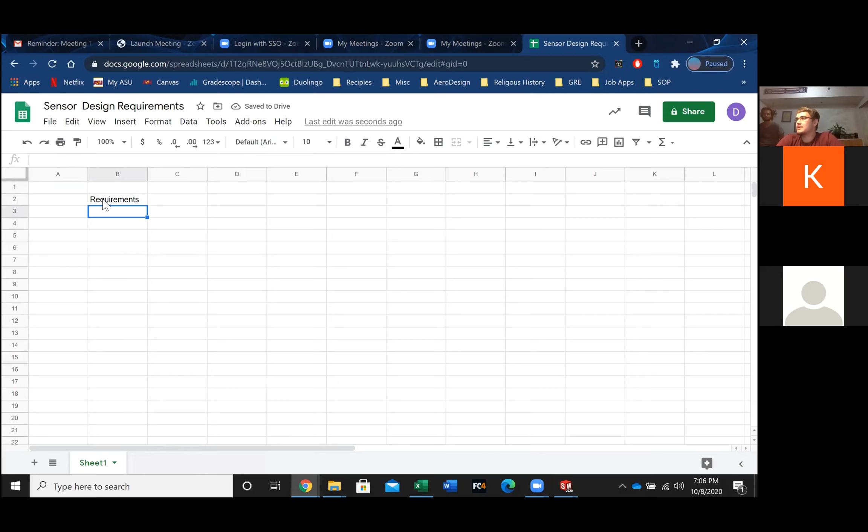So we're going to start by saying, what are the requirements of our sensor design? What are the things that are important when we decide what sensor we're going to end up using on our final aircraft? The size. And what does the size influence? Weight. Everything. Yes, but what specifically does the length and weight of the sensor impact? Scoring. Correct. That is our first requirement.

Ability to fit inside the airplane. And how can we word that in words that don't sound so simple? Oh, we're engineers here. Yeah, we got to make things almost unintelligible to the average human, but it's the almost that's important here. Integratability. Integratability, got it. Perfect, absolutely.

So what is another important thing about what our club specifically has to consider with making our sensor here? 3D printer requirements. Correct. And what's a way of making that not sound so? Manufacturing requirements. Yes, manufacturability. Because we're all about the abilities here.

Okay. Are there any other things that we should say as our requirements? Stability. Stability, correct. Thank you. All right. So we have scoring, integratability, manufacturability, and stability. That's 4 things. Let's think of a 5th. What's important here? Visibility. We have to be able to see the LEDs. Visibility. That's right.

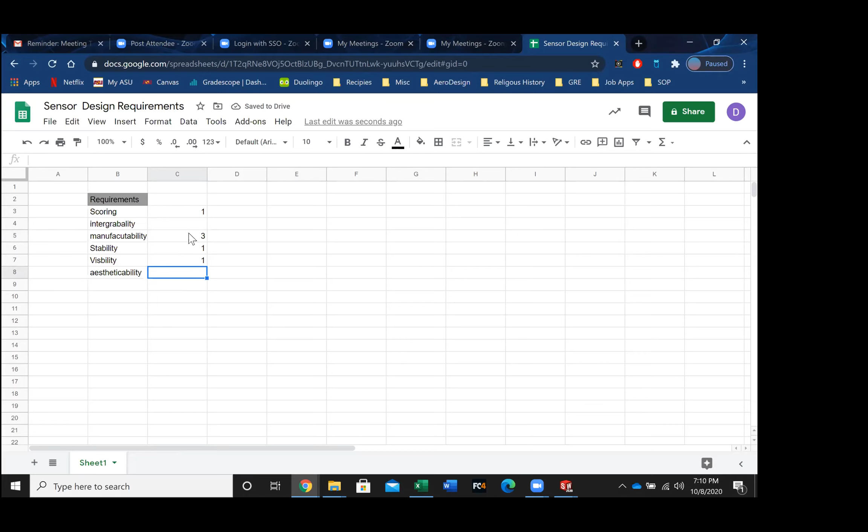Manufacturability, that's like, we'll say that's a solid 3 out of the scale of importance, because it makes my job easier, but there's only one actual sensor that we have to build, so it's okay if it's a little bit harder to actually make. Integration is solid 2, that's pretty important. And aesthetics, you know, we want our sensor to look cool, but it's ultimately not that important.

So we'll put ranking, and then... so now we have a scale factor, which if I reduce the number of points here, so now we have a scale factor by which every one of the following mission designs will be then scaled. So let's just let me fill these in.

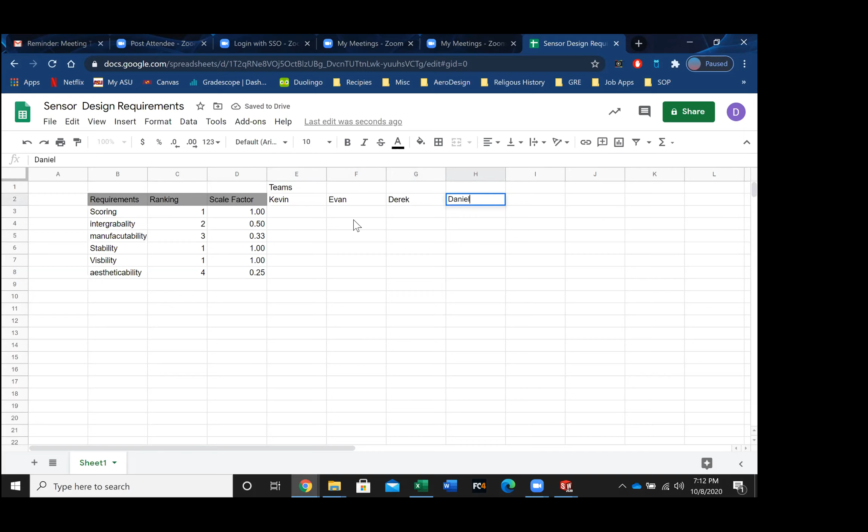So now we have different teams. Those of you who have so far submitted designs include Team Kevin, Team Evan, Team Derek, Team Sticky Keys. Gosh, uncultured. Next, Team Yoga. And has anyone else submitted designs? I have. Okay. Yeah, so Team Jack. All right. So, what about Ivan? Oh yeah, Team Ivan, of course. The original. The original, the OG. So now we have our 7 teams.

And then we will... just drag this along. We'll rank each team a certain number of points. Probably 10 being the greatest amount of points and 1 being the least amount of points on the abilities of each one of these teams in that specific scenario.

So let's do this, and let's give it a nice color. Let's do a nice yellow. All right.

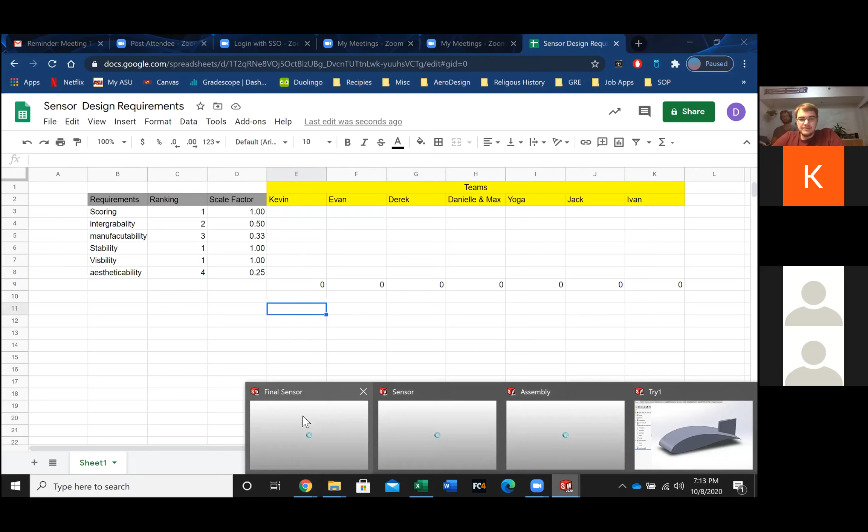So let's start off. Minor problem here is I don't actually know whose design is who. So if this is your design, please call out. Yeah, that's kind of mine. Okay.

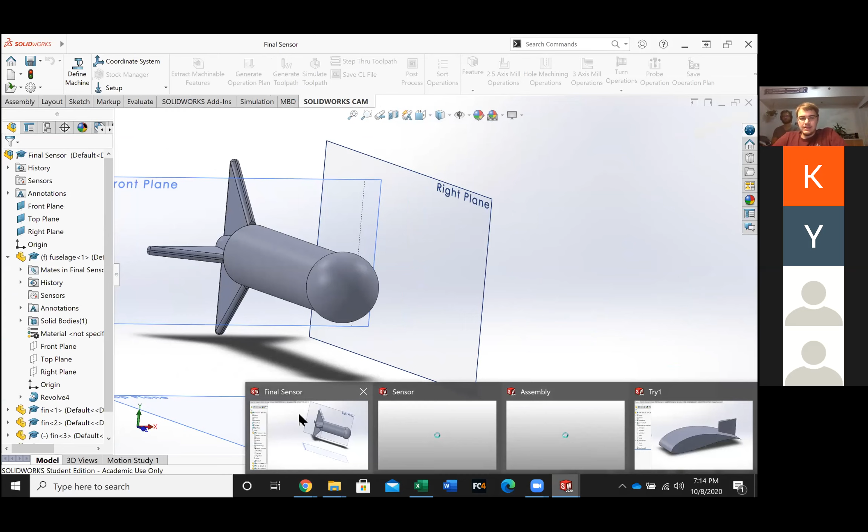All right, so let's go over this. So if we pull up our grading spreadsheet here—oh, not this one, this is... oh god, what is that? That's Excel. We don't use that here, we use only the most... close this off.

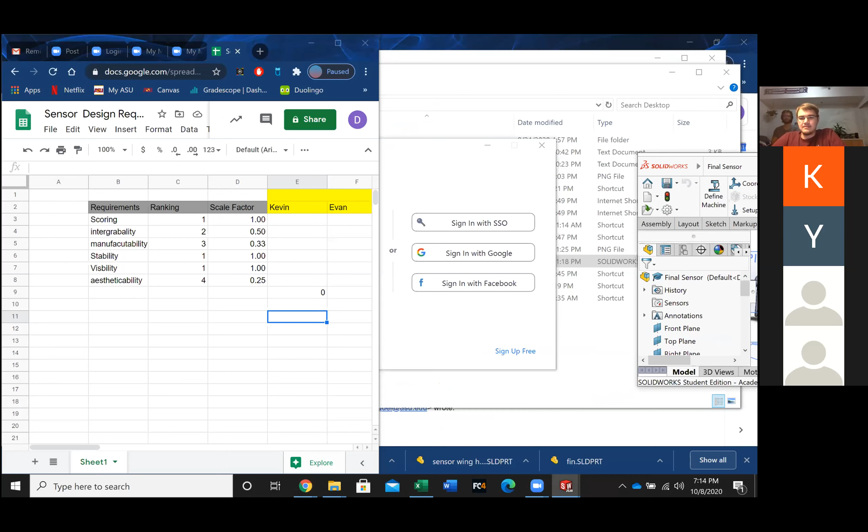I will actually keep that open because I don't know if you want to save that or not. Too bad, it's being saved. There we go. Okay.

Sorry, I'm grabbing the wrong thing here, the wrong edge of the window. So y'all can see both screens, right? No, they can only see one. I can try and put it on both. Yeah, let me try that. No, I meant like both windows get open. Advanced.

Yeah, I'll share screen 2 instead, just so it's bigger and easier for everything else. David's been used to my setup. Yeah.

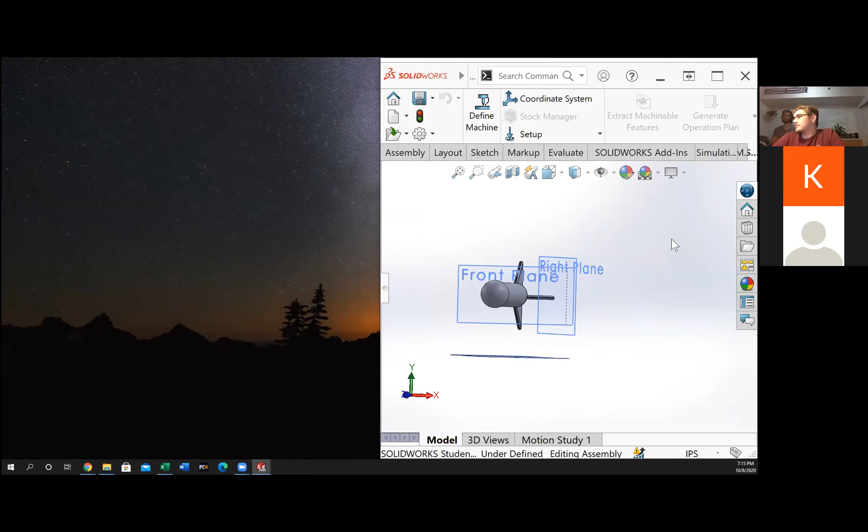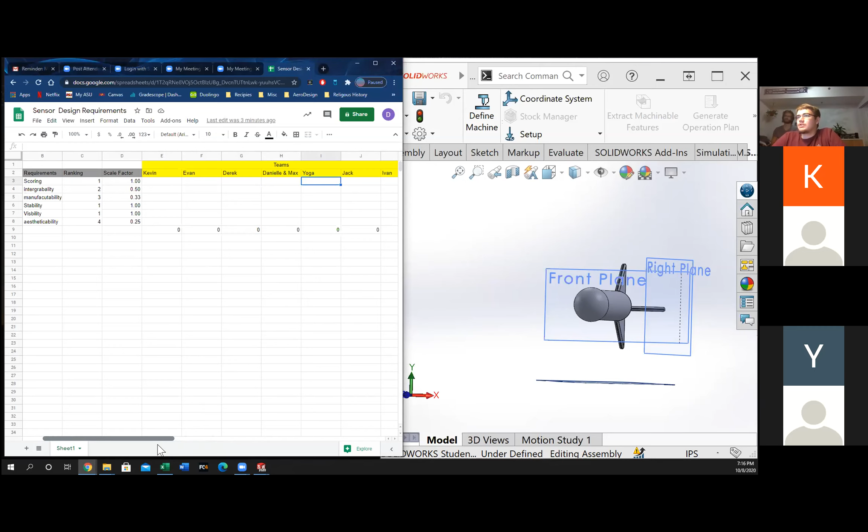Okay, so, yoga. So I'll be honest, the scoring thing doesn't really matter in this competition, because I didn't give you guys a specific length or weight requirement, or length or width requirement, as long as it met the 4x1 ability.

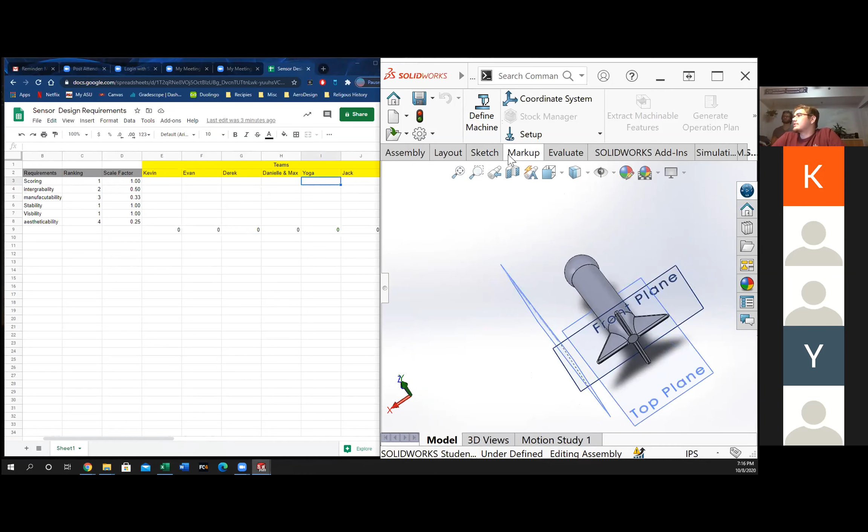So we'll just scale that based off of the actual measurements of it. So if I come over here and measure from its widest point to its... I just realized I didn't take into account the fins for the diameter to length ratio. Okay, that's fine, so you have 5 inches wide and to the tippy top of this—ah, it doesn't like that.

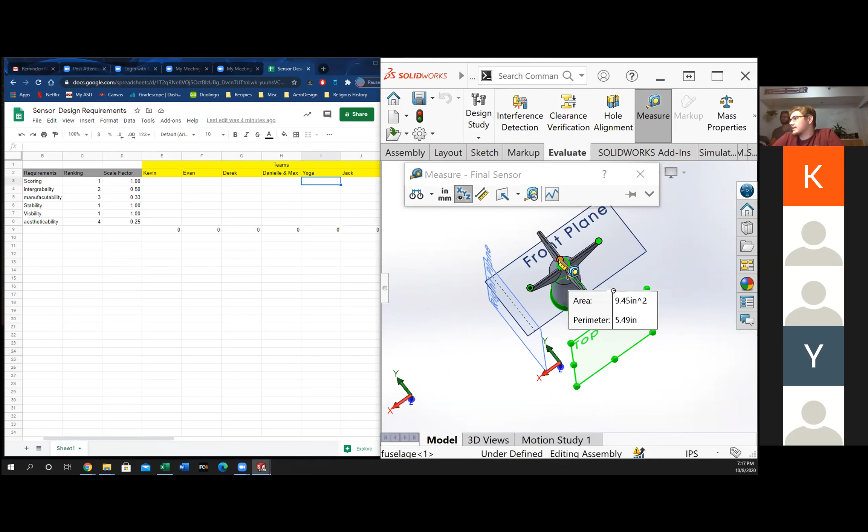Sorry, this is my bad. Scaling from that, I think you're gonna have to deselect some things first. Very true, let's just mash escape a couple times, it usually fixes things up. So it works, yeah. Doesn't want to select the nose. Just put there, and put it back. So it's 6.51.

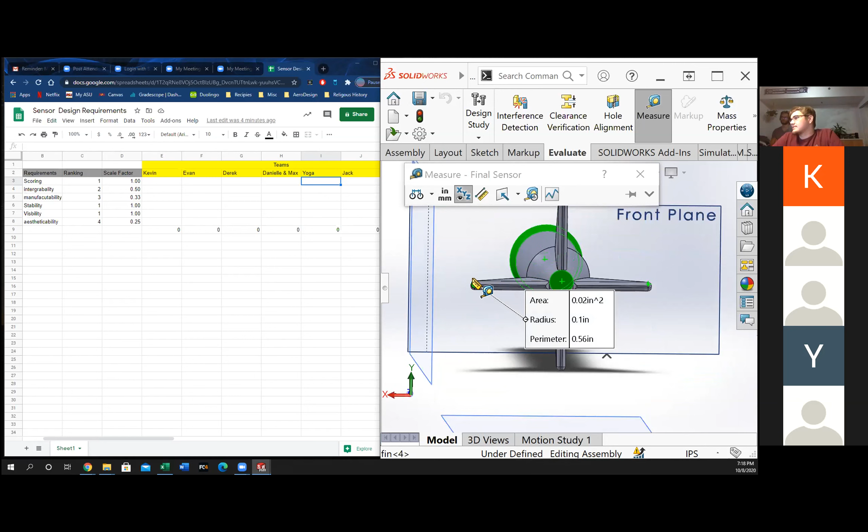So you have a 5 to 6, so that's a 1.25. Is that 5, right? Sorry, this isn't your fault, this is mine. Okay, so it's 4.81, so it doesn't meet the scoring requirements, but that's okay.

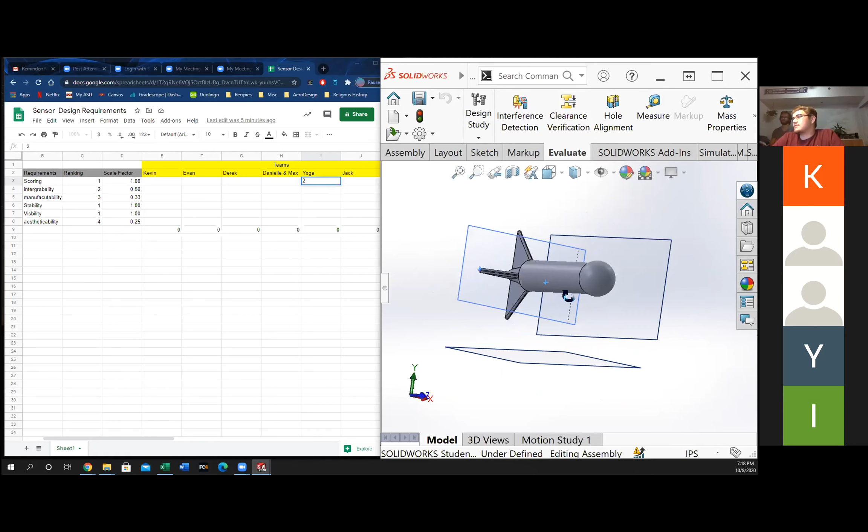You know, it's something to keep in mind for the future. So let's put that as like a 2, because this thing will be pretty heavy, and that's actually good for us, so that's a good thing in that integratability, because of its good length to width ratio it would be fairly easy to integrate into the fuselage. But we can't really score the rest of it, kind of, so let's put that at like a 3.

It'd be very easy to manufacture, let's put that at like an 8. This shape, I imagine, would actually be really stable. It's got those big fins and good length to width ratio, which actually would make it very stable. Let's put that at like a 7.

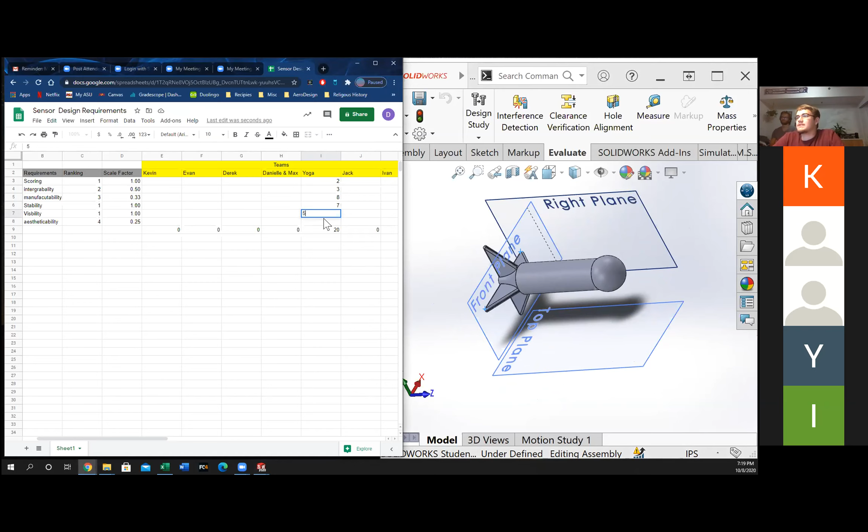Doesn't really have visibility concerns in there, but because of its dimensions, it would be fairly easy to actually integrate that finally, let's put that as a 5. And while it is a good first attempt, I'll be honest, it does look kind of ugly. I'm sorry, I gotta be honest, so we'll put that as like a 1.

Fixed. It doesn't, all right, that's fine, that's easy enough fix to make. We will just insert one left, insert one left. So we'll just have this be equal to uh, we'll just drag this over a bunch. Let's do...

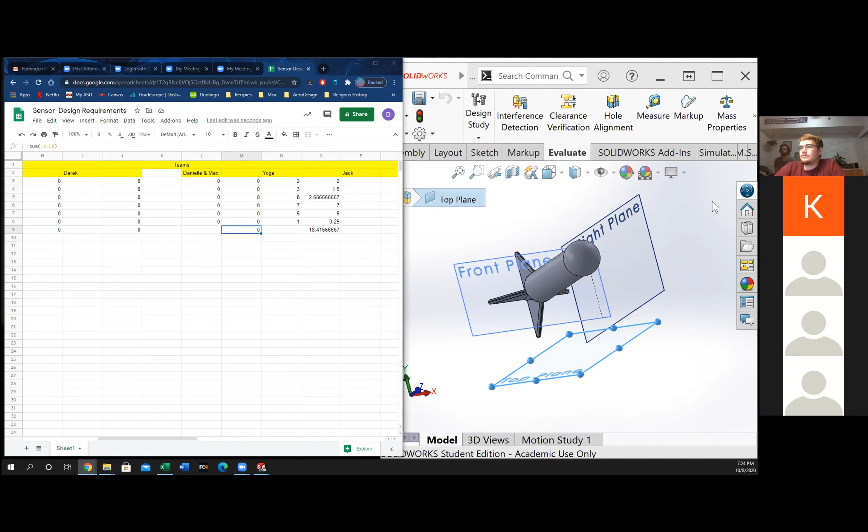Okay, now let's bring up this one. So whose design is this one? That one's mine. All right, Kevin's design.

So as part of a scaling factor, we will first check to see what his diameter is. So it's 1.5, but the fins seem to be farther out. So we'll check on that. So about 1.78 across.

No, they're 2 across. Got it, it's off center. And then we'll measure from here to here. SOLIDWORKS and its always intuitive measuring tools.

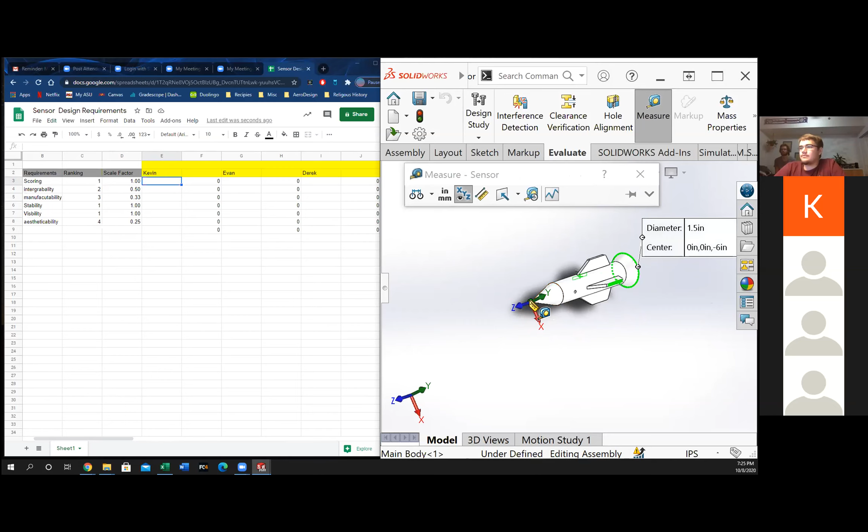So 6 by 1.5, that's an aspect ratio of 4. So that is slightly more than what is required. So we'll put that as like a 6.

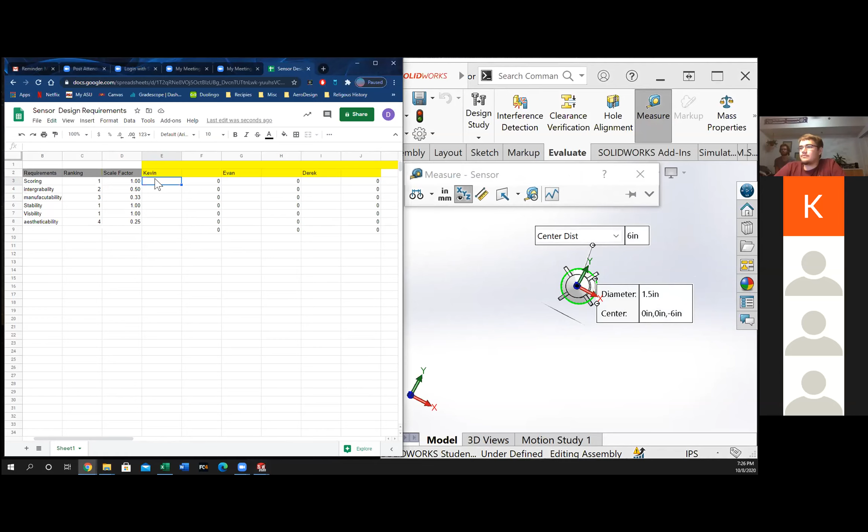Now integratability. The shape should be pretty easy to pull into the actual aircraft itself. It's got a spot right here for what I assume to be a tow line to the aircraft. So he has integratability in mind. And the general shape, there's no weird protrusions or anything, so that makes it pretty easy to integrate.

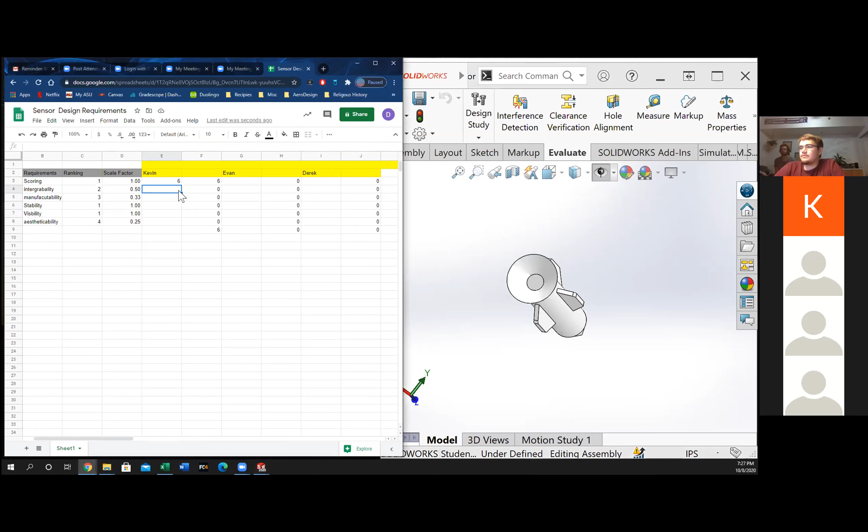So we'll put that as like an 8. Manufacturability: this would honestly be kind of hard to 3D print because it has this rim, this small surface area on the base to actually print from either side. And this cone would also be kind of hard to 3D print. But it's doable, probably put that about like a 5 or a 6.

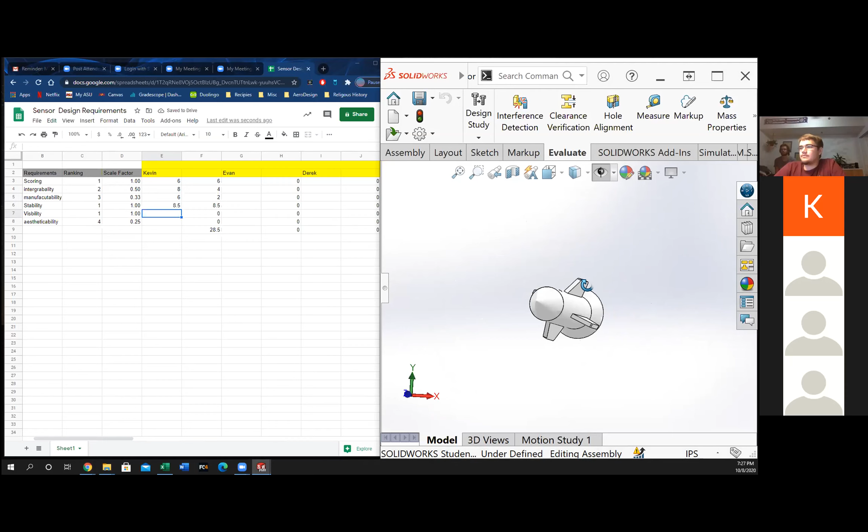Stability: it's got the fins for the roll stability, and it's got the frustum for vertical stability. So I'll put that as like an 8 or 9, let's put it at 8.5. Visibility: again, it'd be pretty easy to integrate different lights into this, so we'll put that as like an 8.

And aesthetics, it reminds me of a missile. The nose is pretty pointy. Would be a good hypersonic vehicle, or actually not a good hypersonic one - you want leading edge radius - but well, you know, it's got that classic missile shape.

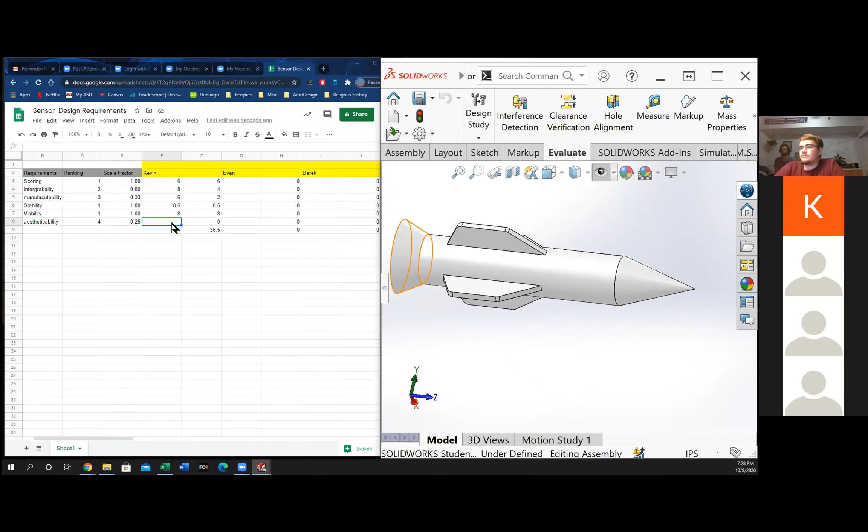Let's put that as, what do you guys think? What would you rate as the aesthetics of this? 7? I got one call for 7. Any other calls for any other numbers? 7 sounds good? All right, 7 it is, 3 calls for 7.

So total right now is 43.5 points.

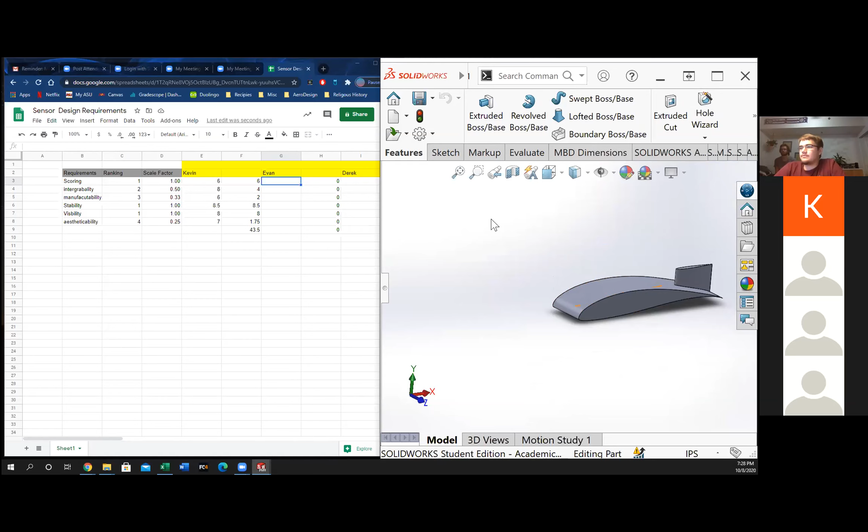Now let's see what Evan's design looks like. So this thing is pretty wild. Evan, you want to walk us through your design right here? I mean, I can. It's really not done, I didn't finish it in time, so there's no hook point or anything.

But I took a thick cambered airfoil, had to be thick to fit the battery inside. It's an airfoil camber that's designed for human-powered flight, so they're for very low-speed flight, much like our aircraft is going to be performing.

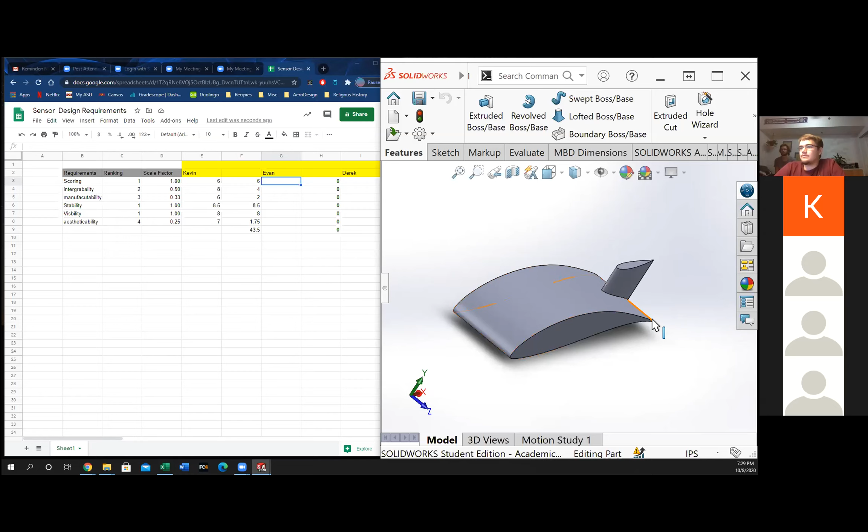It's got a single stabilizer in the back for yaw stability. The goal is to create some lift so it can counteract some of its own weight. Obviously it's not going to create enough because of the low aspect ratio - it's going to lose a lot of those edge effects and not create a whole lot of lift, but it'll be at least a little bit. So hopefully the increase in lift against weight will counteract the drag that the actual shape makes.

Right now I haven't put any roll stability on there. I was going to put some sideways fins on it to help with the roll. So right now I didn't have time to test it to see what it would actually do.

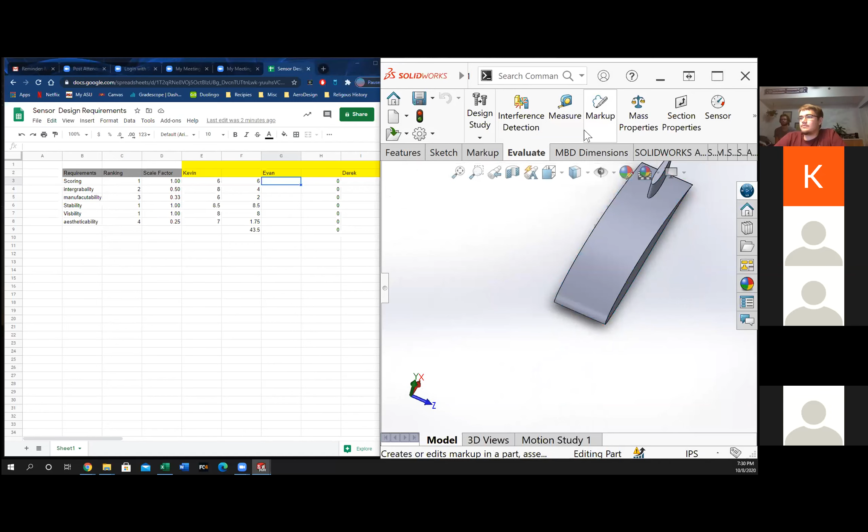So it kind of looks like a piece of salmon too, if you guys are into salmon. It needs some winglets. What was that, Evan that said that? I guess we can't fire a chief test pilot, but yeah, you're fired for that. We can promote him to safety officer. Ooh, that's true, run him out of my hair. The ever-encompassing daredevil's punishment. Yep, absolutely.

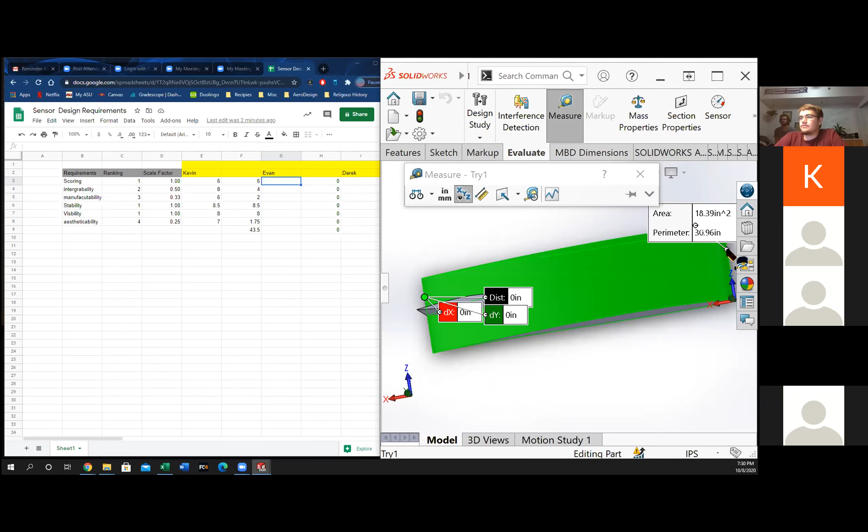Alright, let's pull out this thing. I believe I saw it was 6 long and 1.5 wide, so it meets the scoring requirement.

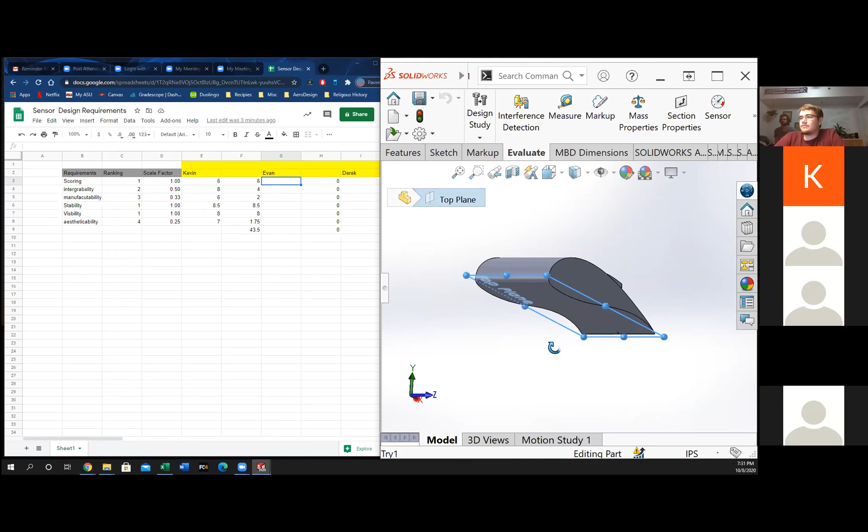How do you think the volume efficiency of this actually is? Like how effectively does it use the weight? Compared to a regular shaped object, how heavy do you think this is? How much volume does it have to put more weight in? Just for my own design, on a scale of 1 to 10, how well does it use its volume to create weight?

There's a lot of unused space inside there, but you can also do it empty. I don't know, I'm gonna put it up to the group. It's a little bit, probably not, definitely not top tier. There's a lot of wasted space inside there, so maybe a 5 or 6 on that one.

Alright, 5 or 6 it is. My own rating is up to 7. So if someone else says like 3 or 4, that could work too.

Just drag this down. Alright, so interchangeability or integratability, not the best. I think this will have issues when it's actually coming into the fuselage of the aircraft.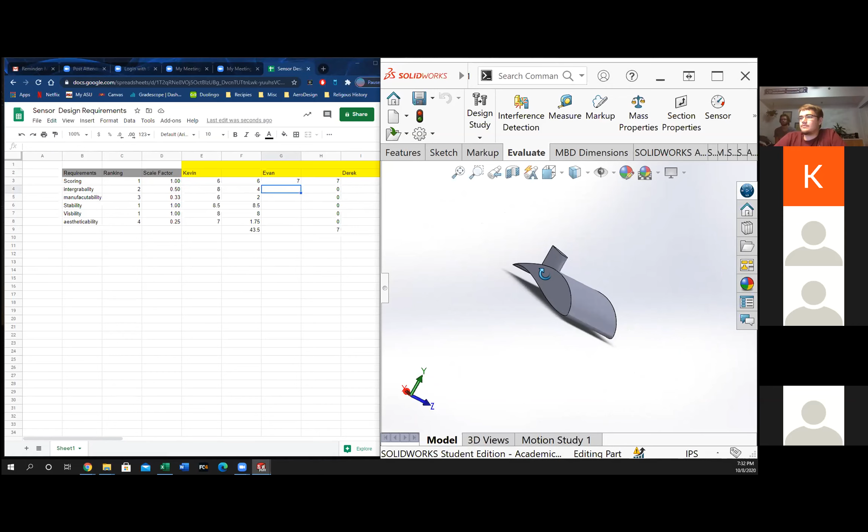Manufacturing: it'd be pretty easy to print this out, depending on how you printed it, either flat against this side. You might put some supports on here, but...

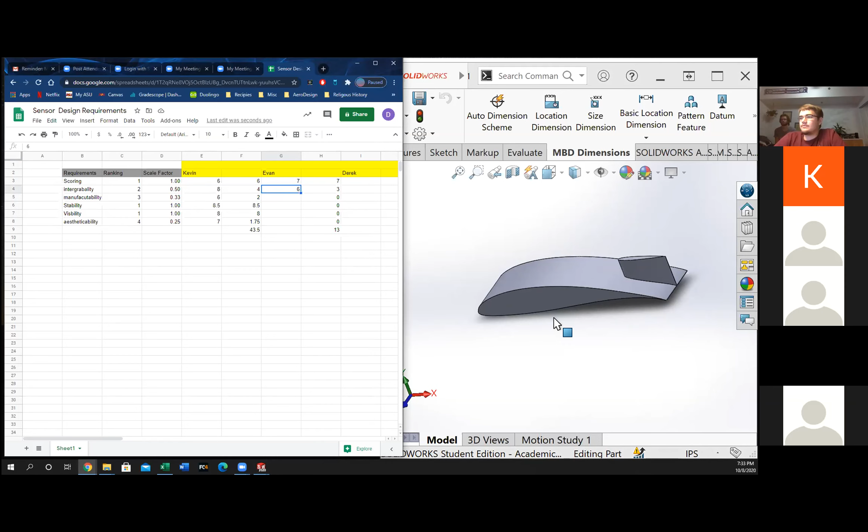Actually, I'll mark this down a little bit on integratability from what it was, because the other thing about integratability is how we're going to fit in the electronics, and it's going to be pretty hard to fit them in.

I designed a fairly thick airfoil, so there's a lot of room inside there. I don't know how big batteries are, I didn't get any specs on that. And how big are those batteries anyway?

They're fine, depends on what batteries you get. We did have a spec for a certain battery size in one of these, you could find them in any size, like a 1.5 by 1 battery. I don't know how big that would be off the top of my head, but it probably exists. We'll bump that up to 5.9.

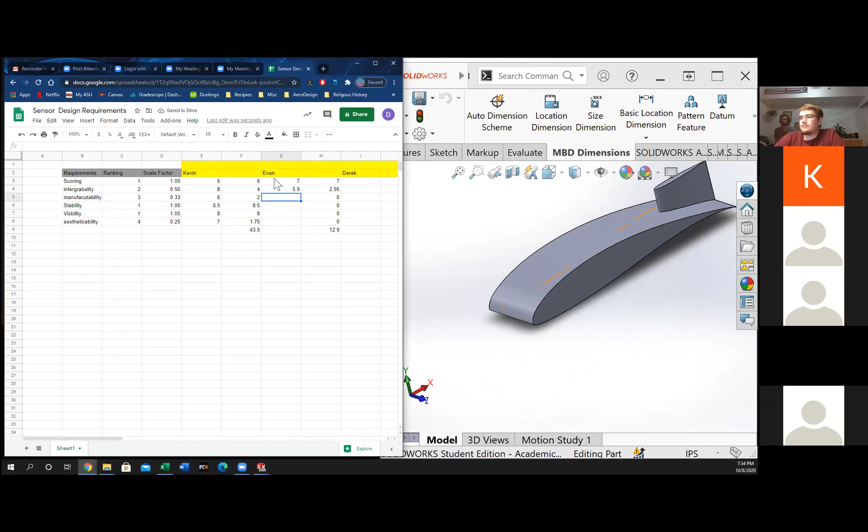Manufacturability: it's fairly manufacturable, as long as you pick a flat side to print it on. It would change probably with how the fins fit into the sides. So for now, let's put this as a little bit more manufacturable than Kevin's form factor — put that as a 7.

Alright, stability. What's the pitch stability like? So at high or low angles, it's got decent pitch stability, positive, so it wants to nose down, which is helpful since it'll be towed from the front. Have you thought about where you're going to put your tow point in relation to the quarter chord? Yeah, a little bit in front.

As it currently stands, the roll stability isn't the greatest, so it's about 0 — that's something you haven't considered yet. Winglets, of course, something like a lifting body, like the Dream Chaser — you guys have seen that space reentry vehicle, it's pretty cool looking, might be good.

So it doesn't have — well, it has good pitch stability, it has good yaw stability because of that fin in the back, but it doesn't have good roll stability. So it has 2 of the 3. Let's put it at 2/3.

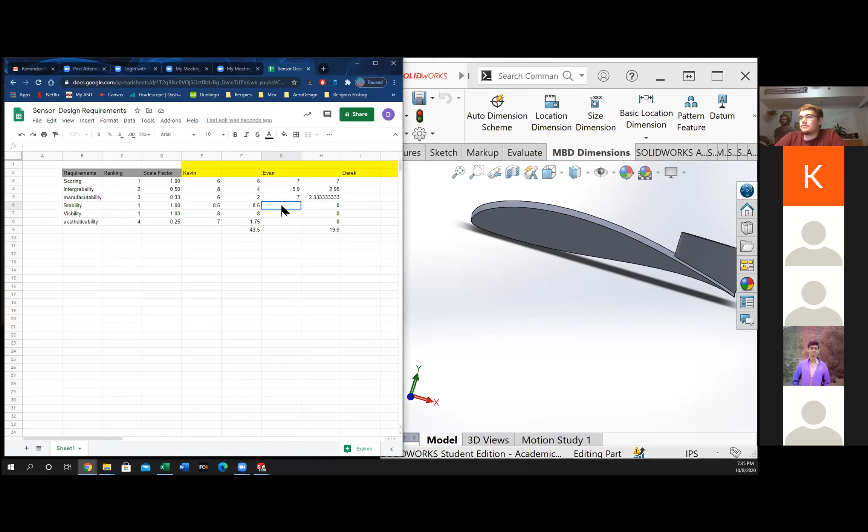Actually, in relation to what we put the other one at, 8.5, it's probably like a 7. Give it the extra third of a point there. Visibility - you could probably fit some LEDs on the underside here, because no one cares about underside flow, it's the top side flow that matters.

You want to slow down the underside flow. Yeah, exactly. They get stagnant here, it's higher pressure.

All right, aesthetic ability, I don't know about. It looks like a piece of sand. What's - a 3? A 3? I got a 3 in the peanut gallery.

Anyone else have any scores they want to put this at? Give it a 4. What for? 4, hey, thank you, 3.9. Okay, we got 1 9. Wow, someone really likes their sand. Let's go with a mode instead, or median instead of mean.

All right, let's do - so we have 1 3, right? A couple 4s, how many 4s do we have? We have a couple 4s, 4 4s, we have 1 9. That's really gonna help my case. Thank you, yeah, I'll second the 9. That was a 3.9, so we have 2 9s, 4 4s, and 1 3.

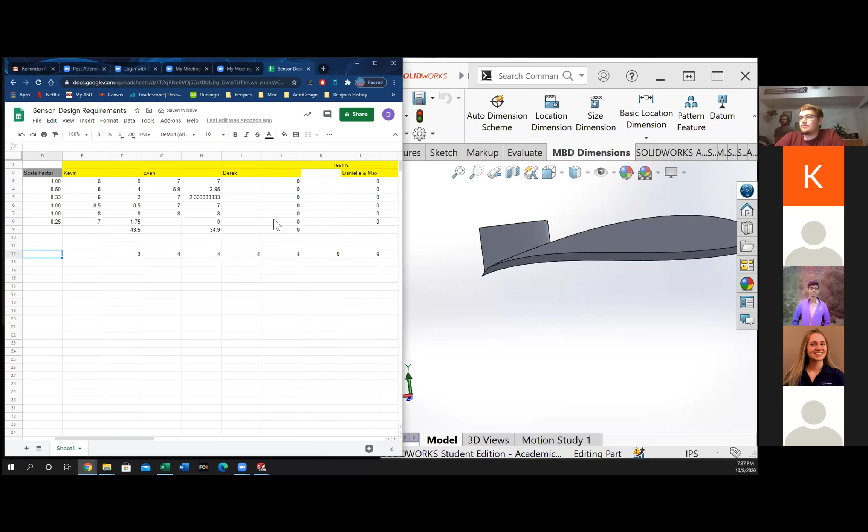Is there any other cases before we close? I'll do a 1 just to bring it back down. Okay, I'll put a 3 to bring it back down. We'll replace one of the 4s with a 1. I'm keeping my 4. Okay, you got one person keeping the 4.

Sum divided by - should have done this in Excel. Listen, all right, you had it. So divided by blank. How much is that? 1, 2, 3, 4, 5, 6, 7, 8. It's wrong.

4.25 is your average, it's better than the 3 that Jack gave me right off the bat. Okay, okay, oh, you're behind Kevin's score. Now let's see, Derek - did Derek send me his?

thebomb.com. Derek, score you wanna - 11. I can, but my mic ain't working. I don't know why. Okay Derek, explain yourself in here. Explain myself? It's a relatively simple design.

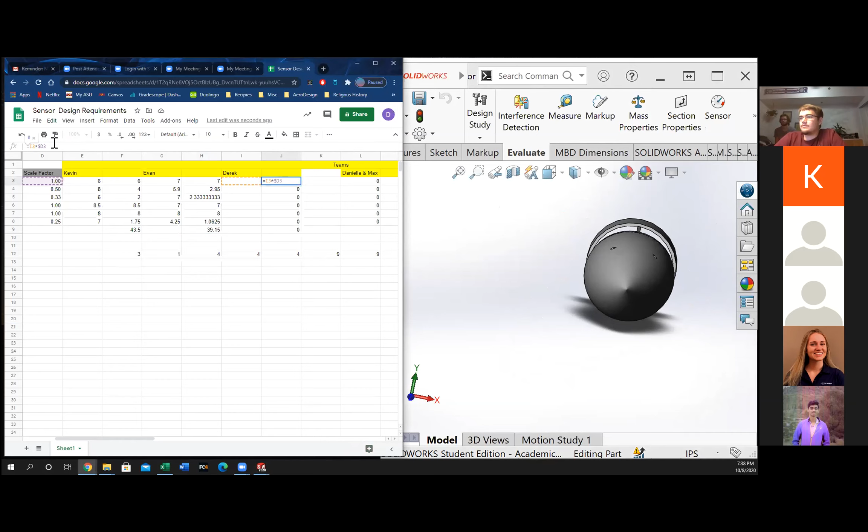It's just a football shape with a tail cone on it, essentially. Football with tail cone, basically. Yeah, all right, the cool part is it really - what it looks like, it screws together. You put threads on this? Yeah, so if you cut it down the middle.

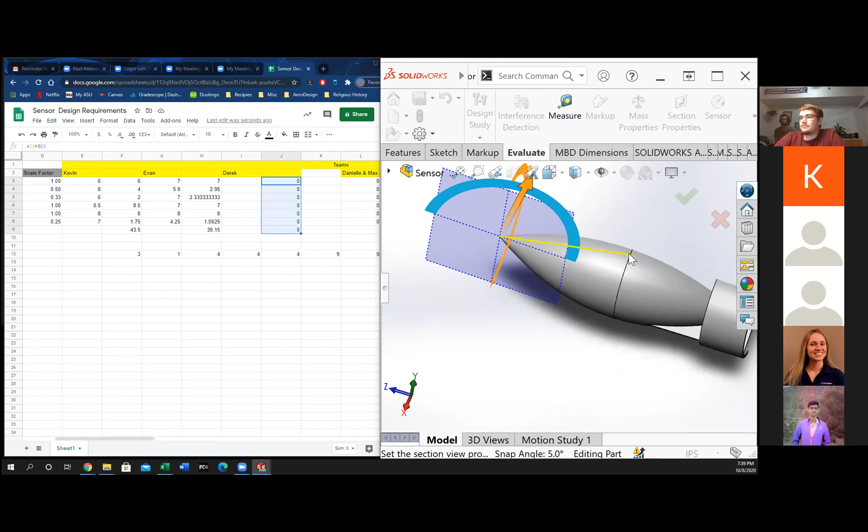So how am I going to be able to 3D print this? Let's guess, it can be split into multiple parts, it doesn't have to be explicit. 3D printing threads is something I haven't gotten to do yet. 3D printing threads is easy, I have printed them on multiple occasions. Fair enough, I don't know.

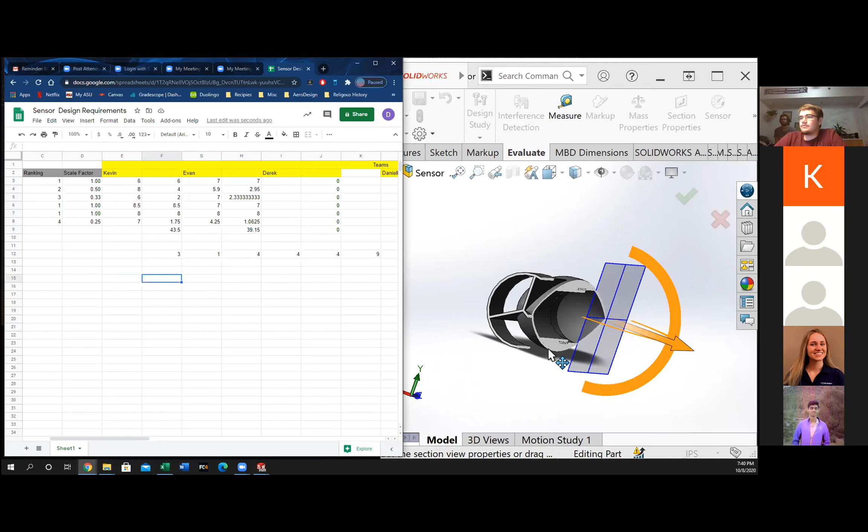I also have to put a mounting lug on it because I would want to kind of move the mounting lug around, if this shape ever decides it wants to fly. I don't know if it does. I'd want to move the mounting lug around to see if I can balance it. Well, at some point we'll throw it up though. Yeah, but I would want to move the mounting lug to see if I could balance it statically. Very important. But statically and in flight.

Okay, because too far forward it's going to be tail heavy, too far aft it's going to be nose heavy. So see if you can balance it - here's the problem, it'd be on the top load. What, oh, it's 3 to 1, isn't it? 3 to 1, oops, let me make it an inch longer. I'm solved - 2 inches longer. That was big, give me a minute, this was late at night.

Okay, so it doesn't meet the length to width ratio. So what do we say that score is if it doesn't meet the ratio? You're going to put me at 0.

I got one call for 0. Anyone else have any calls? Oh, come on, somebody give me a pity 5. 5? Okay, 6. 5, 5, 5. What is the score for?

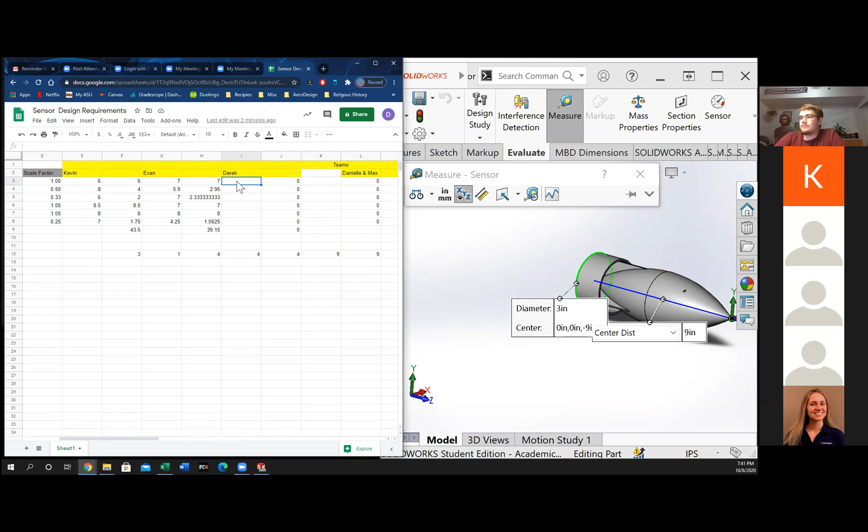Ability to score. Well, should be 0. But most of the others have units, so it changes like that. No comment? All right, I heard some 5s. I don't want to do the average thing again, that took too much time. Let's put it as a 5.

Okay, let's see what the interchangeability or integratability is. It's a round shape, it'd be pretty easy to just drag into the fuselage. It's probably one of the easier ones because it's very self-contained, there's nothing to snag on. So I'll put that as like a 9, it's probably the most integratable.

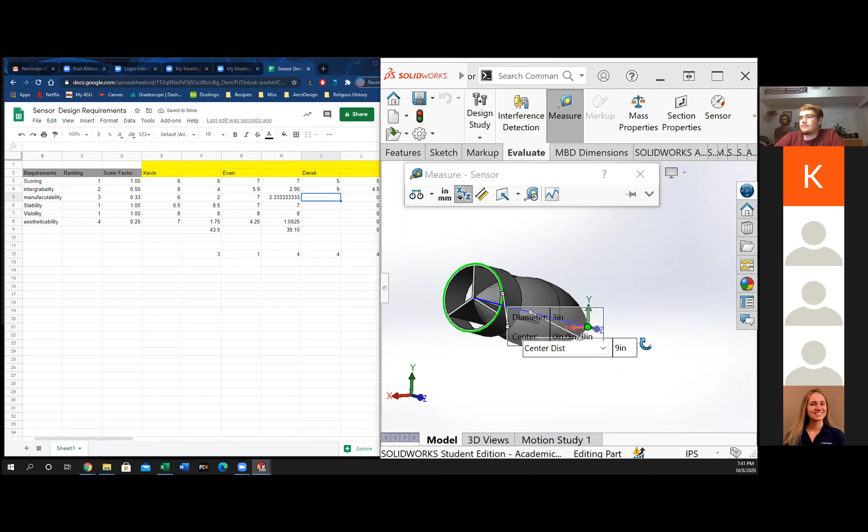Manufacturability. Besides my own inhibitions about the spirals right here, it's a pretty easy print to do because you print like this basically, and these things act as support for the circularness of everything else, and you print this piece. So that's pretty manufacturable, fairly easy for me to print without any issues. I'm willing to call that a 7 or an 8, probably 7.5, 7.45 actually.

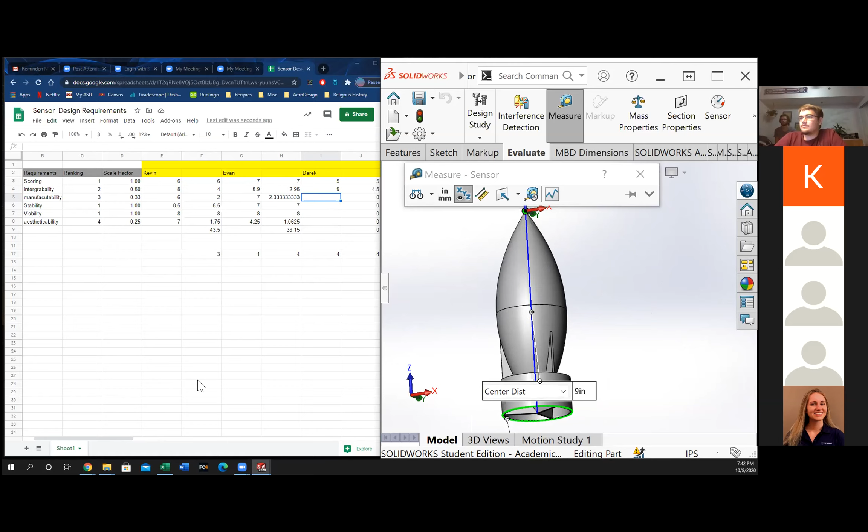About 7.45. Stability, so I have no idea, it might be okay or it might be garbage. It looks like a little face. I think it really depends on where the mounting lug is, which is why I wanted it to be kind of up in the air.

Roll stability should be fairly good because it has these things. Pitch stability, I don't know, well pitch stability is going to depend a lot on if you can statically balance it. Especially with this design, yaw and roll are pretty good, pitch is a little sus. If this was Among Us, I'd probably vote pitch stability off. But I'm gonna call that a 7, 7 for stability. Actually, I'm gonna call that 7.5 because I think it would be more stable than Evan's design.

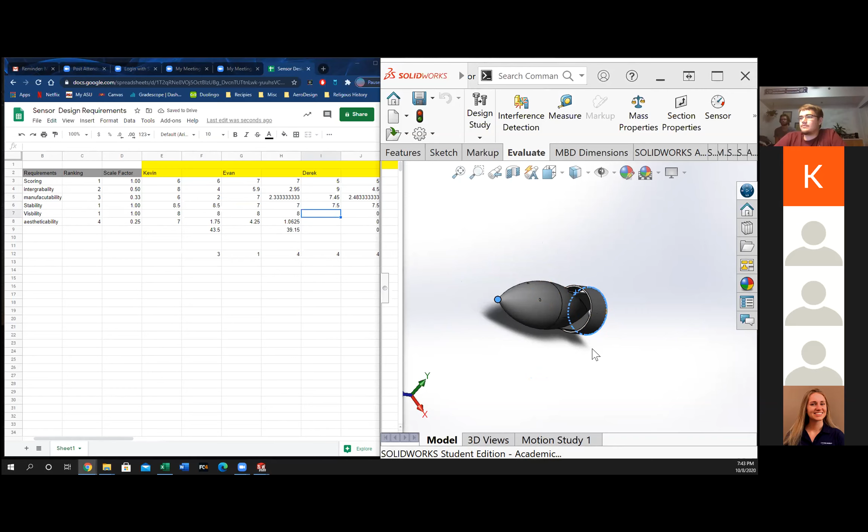Aesthetics, I like that it kind of looks like a bullet or a fat man or a mini nuke, if any of you played Fallout. Yeah, 11 out of 10. I give it a 9. Okay, so the average is at 10 right now. I give it a 0. So the average is at like, I don't know, it's too late for math. Any other opinions, 6 on point? 6.2? Actually, I like that it has a face, I thought that was... okay, bumping up to a 5.

All right, what would you say the average is there? About 7. Oh, come on.

Ah, of course. The backspace key is broken. It's the delete key, that's why it's broken. Exactly, it's delete, and so it's broken.

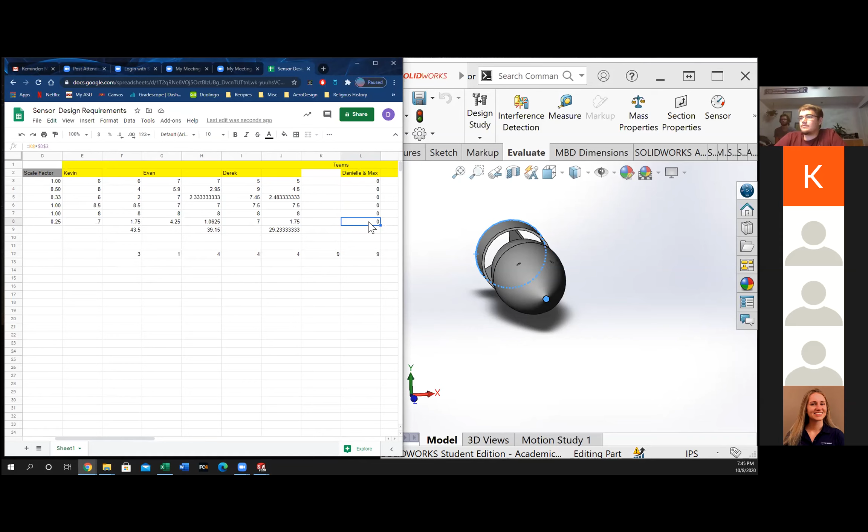All right, Danielle and Max, let's see what you guys have for us. So you guys had this one.

Yeah, all right, let's start with the all-important making sure to fix my mistakes in the Excel document. Okay, ah, that was the wrong thing to fix. This should be, delete these actually, it's L3 times D3.

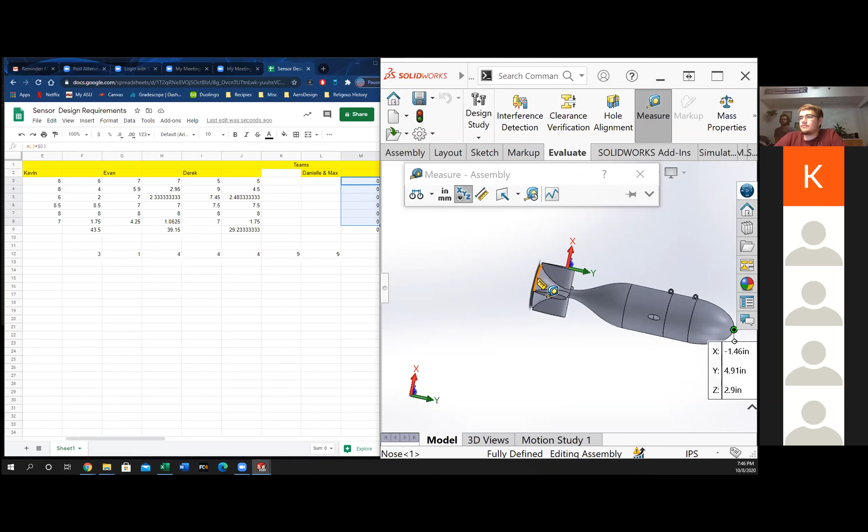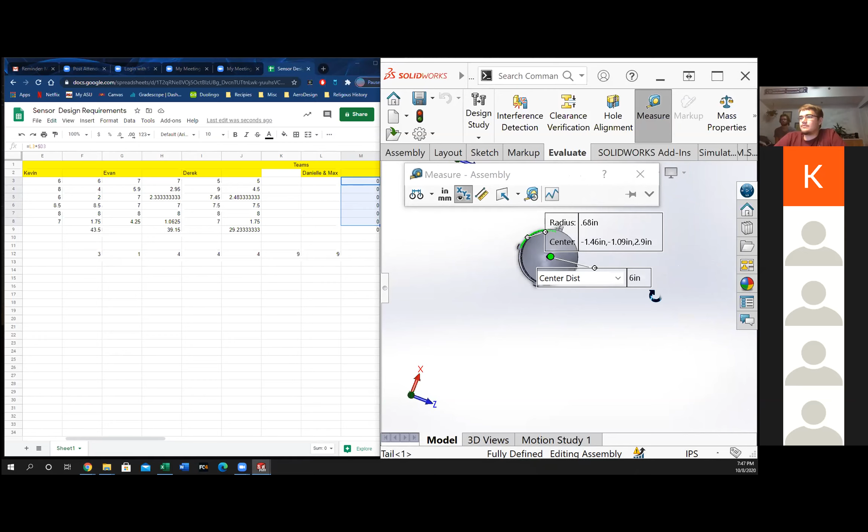All right, so let's start with the measurement of length to widthiness. Okay, so it's 6 inches long, and this has a radius of 0.68, which means its actual diameter is like 1 1/3, right? Yeah, the fins poke out to 1.5 inches in total diameter. Okay, and that is a 4-to-1 ratio, if I'm right? Yeah. Okay, all right, I'm willing to accept that explanation. Okay, so we took that into consideration.

It looks like it's a pretty good use of the available volume. It could technically be more efficient if it was more squared, but actually, no, it wouldn't be, a circle is the best. Yeah, circle is best. Okay.

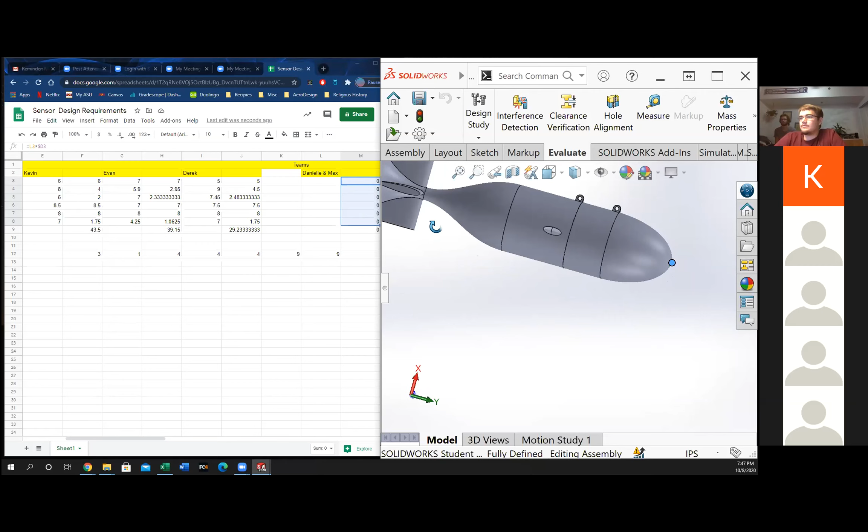Yeah, for volume it would be a circle, because otherwise you can have a situation where you have a diagonal length that's more. It also depends on how they actually score these things, which is unclear. So it looks pretty good.

That's not till later, so it scores well on the scoreability. I'd probably put that as, let's call it an 8.

Now let's see what is the integratability. They have multiple toe points, and these are ports for screws to connect the multiple pieces. So they have that taken into consideration, how the two pieces fit together. That's pretty good, I'm going to give that as like an 8.

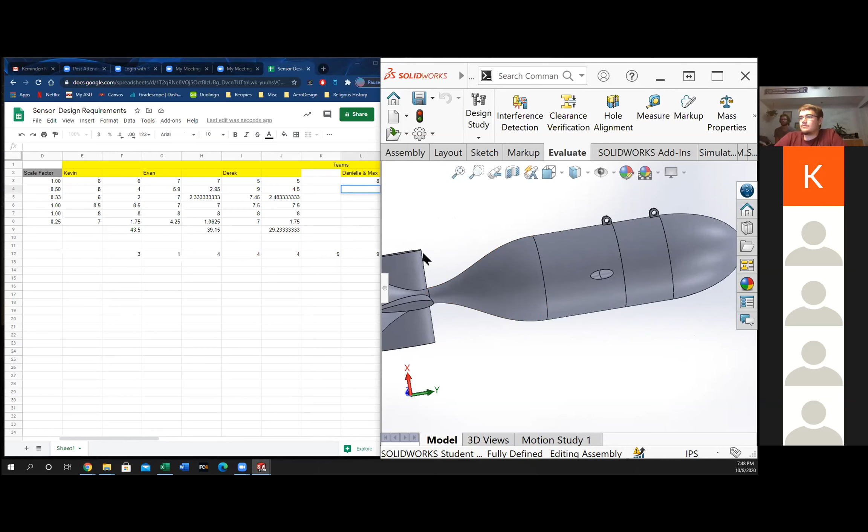Integratability into the thing—actually I'm going to take points off slightly, because there's a very small chance this could get snagged. So 7.8... it's a small but appreciable chance. Also, technically, these mounting lugs would be outside of the radius, I'm pretty sure.

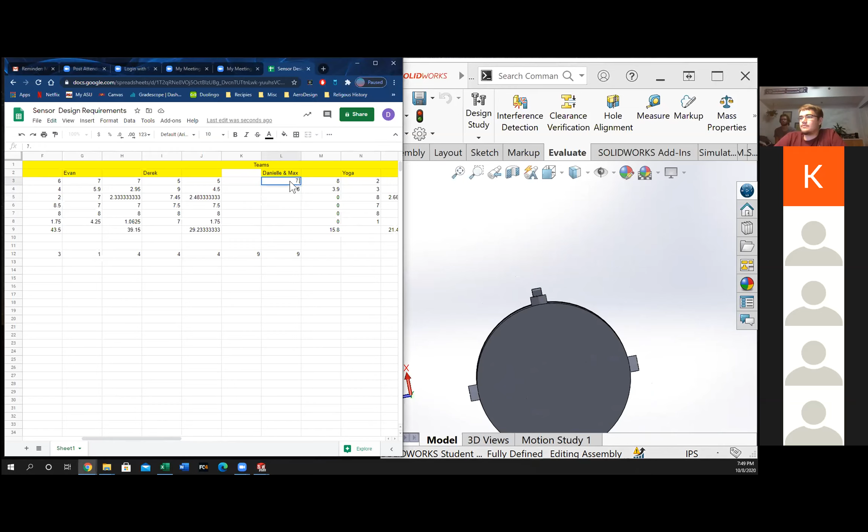Unless you have these even—are they even? I can't remember. Looks like they're slightly above the profile of this, so 7. Easy fix, but still a knock-off in the current design.

Manufacturability—this is multiple pieces, right? Yeah, it is.

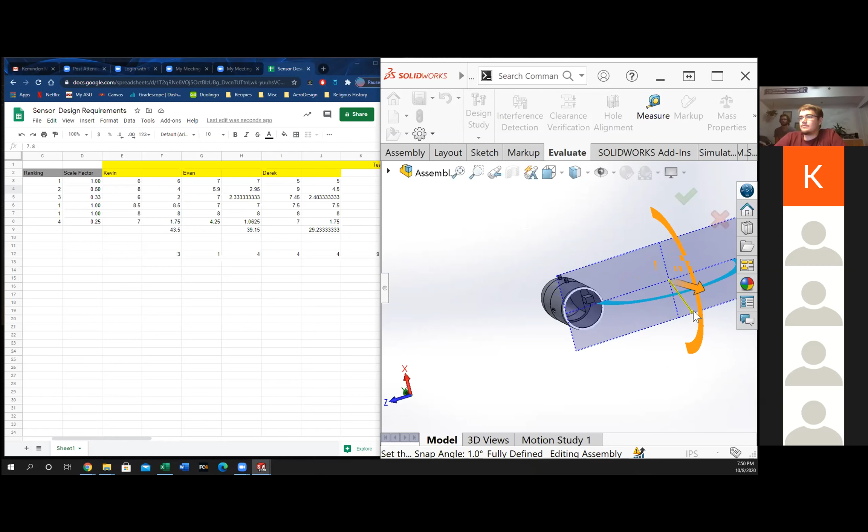Okay, so it is slightly diagonal, that's probably the way I did this. So you have a locking lug there to prevent rotation, and you have two screws that come in to keep it attached. Actually, I think that is a channel for the thing.

The multiple parts are pretty easy to 3D print, especially when this is one piece, which I like. That's one of the advantages of 3D printing, making everything one piece. So I'm going to call that an 8, not 7.8 this time.

Stability—you've got the fins for roll and yaw stability, and the frustum for pitch stability, just general stability. I'm willing to call that pretty stable, let's call it an 8.5. Stable, very stable.

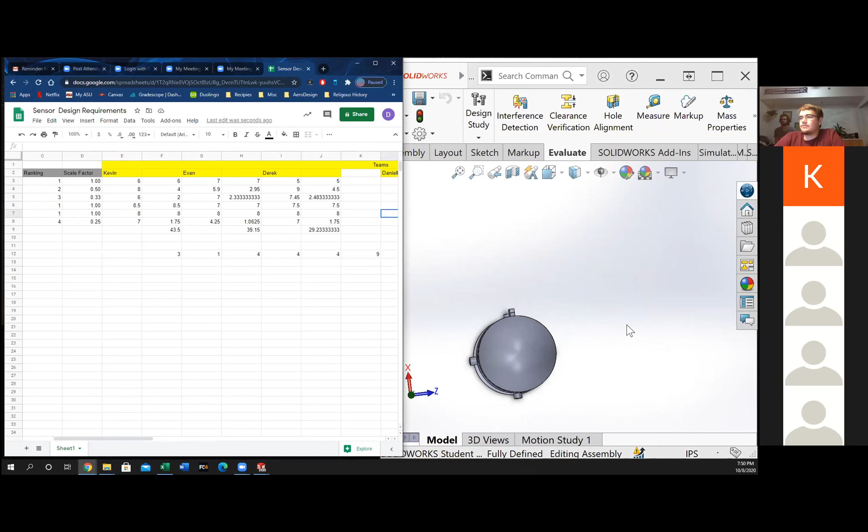Visibility—you can put in some LEDs here. That wouldn't be that much of an issue, same as we can do with everyone else.

Anyone else? All right, well let's give it a 7.8—7, there we go. 7.6, that's what I meant.

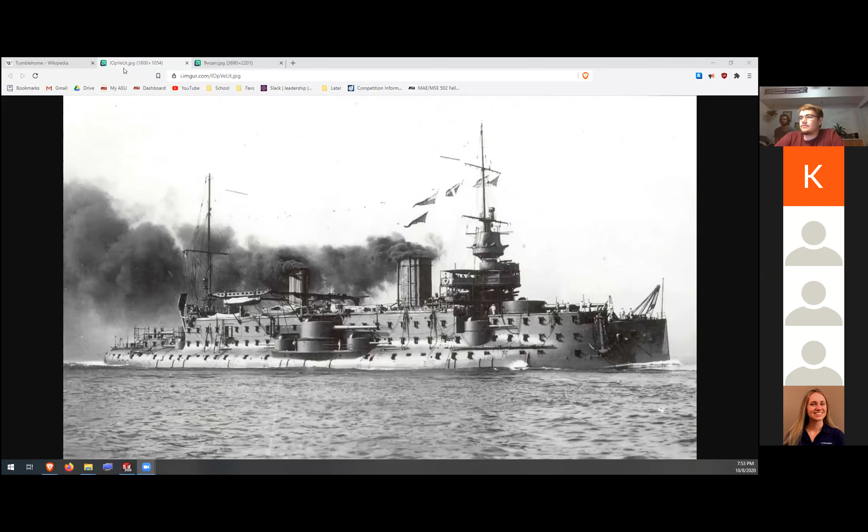My amazing pitch. Okay, make sure you share your screen. All right, so like the great designs before it, these French tumblehome battleships—I've adopted a tumblehome design as well, and here it is. It's a beauty. Oh wow, that's bold and brash.

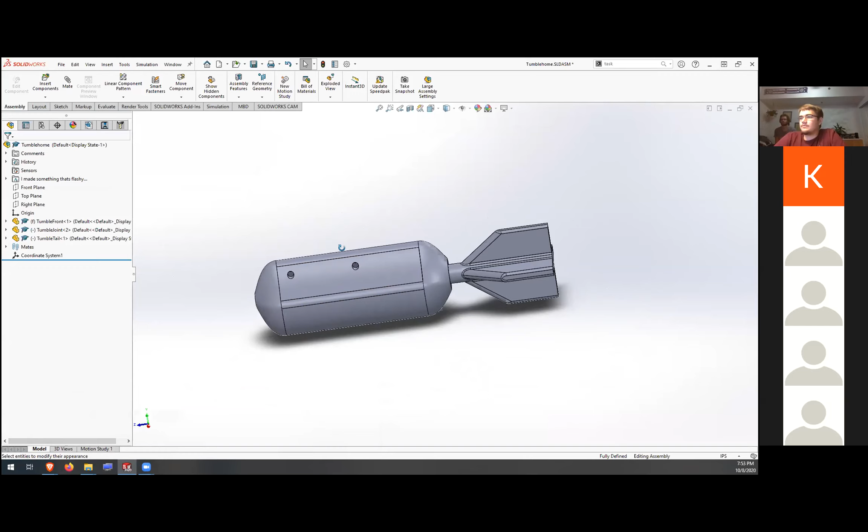All right, so aesthetic score of 0—no, it's 10. Anyways, so it is 6 by 1.5, so it's a 4 aspect ratio exactly. It's broken up into—let me get the exploded view.

I don't know how you're supposed to do this. Okay, I'm just going to hide it instead. All right, so it's broken up into 3 parts: a tail section, this joint section right here, and it's already dimensioned, so if you want to 3D print it, it should work.

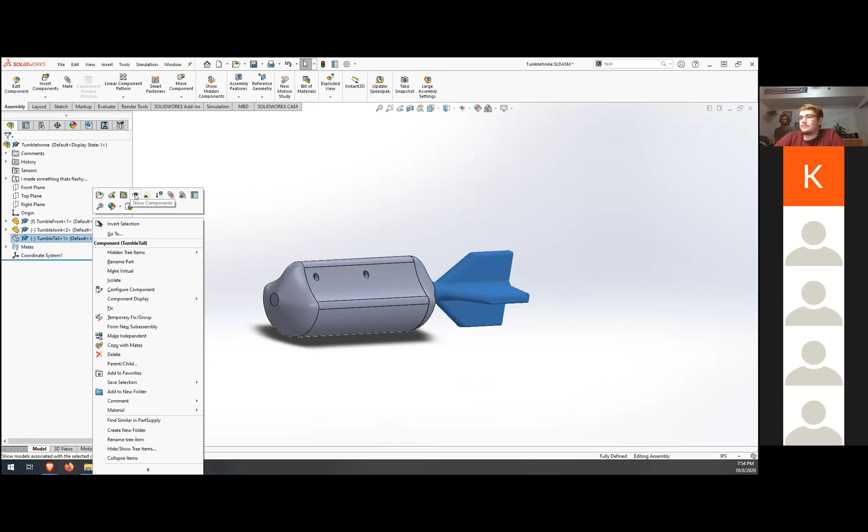And this front section, it's pretty great. I think it's obviously a 10 on aesthetics. It has some light holes. It's got the stability down. If you check that CG, it is noticeably below. Very noticeable. Yes, it'd be better if you had some depleted uranium weights in there. Yes, as you see, the tumble home design pushes the center of mass towards the bottom.

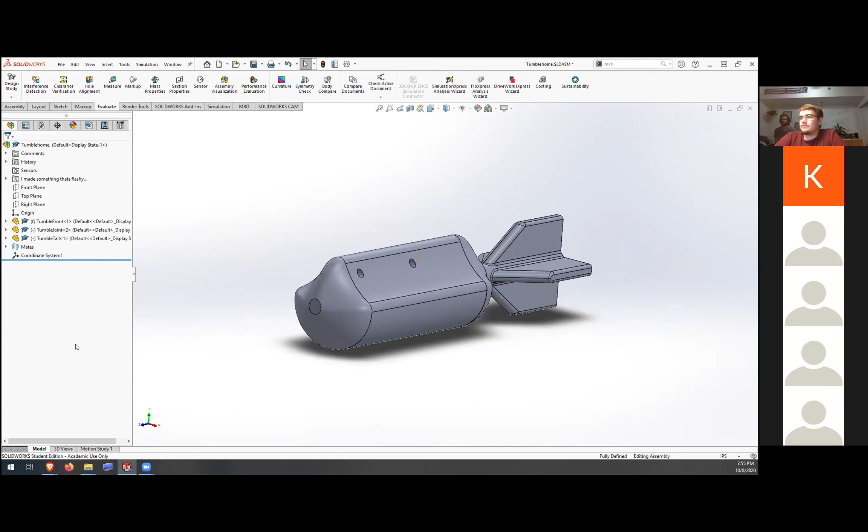And as you can tell from the renowned French Navy, it worked really well on their pre-dreadnought ships. Yes, they certainly didn't have any problems with stability. What's old is new again though - the Zumwalt has the tumble home, but okay.

So I will say, it looks like you made a pretty efficient use of the weight for the volume available. And it does meet the aspect ratio thing. So I'm willing to give your score a 9. Let's say a 9 for an 8.

Okay, so next is integratability. You clearly thought of that - you already have the towing points attached in there. The one thing I will say is that the third piece, that's more of a manufacturability thing, but you have plenty of room inside for electronics, plenty of areas to have LEDs come out. So I'll say that's a nine as well.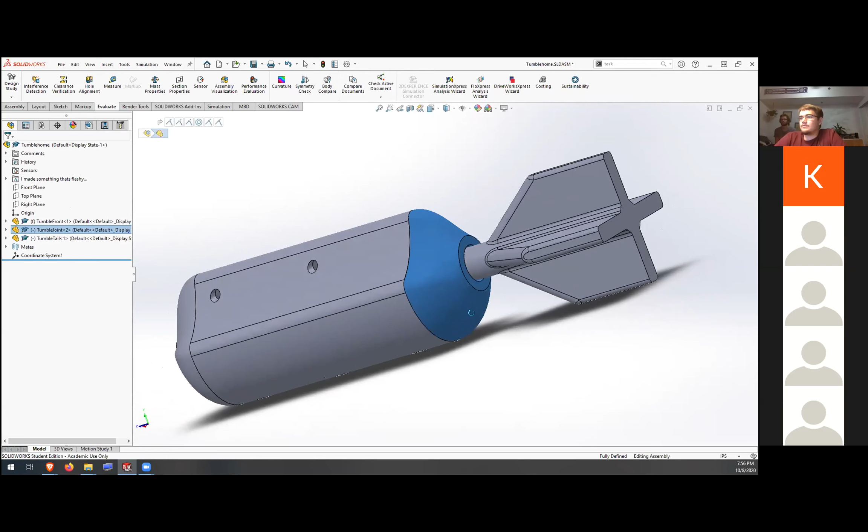Manufacturability - the one thing I would say to make it easier would be to have the joint and the tail be one piece instead. It's a fairly easy change to make, but it's just easier to print that as one piece.

One thing I wasn't sure about is I could place this tail in this T configuration, or I could place it in X configuration. I don't know which is better for stability, or if it really does anything.

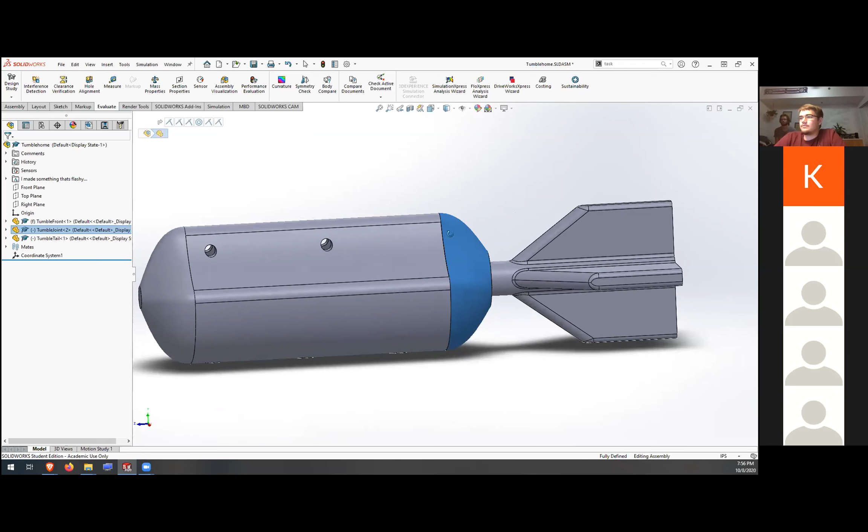Some inspiration to look for there is submarines. Submarines often have cruciform, which is just up and down, or up and horizontal, and then an X form tail is another thing that they do. So you could look for some inspiration there in why they do the things the way they do. So manufacturability, slight markdown for that - I'm willing to put you at like an 8.

Stability looks fairly stable. I honestly have no idea how this tumble home design would work, because normally in the water the upper part of the ship doesn't really contribute to stability, besides just where the center of mass is. But this, it's pretty much acting as another fin, but I don't know if that would help or hinder. So we have to drag this through the water to make sure it's stable? I don't know. Does someone have some sort of small tub that we can use? I got a pool. Yeah, that would work.

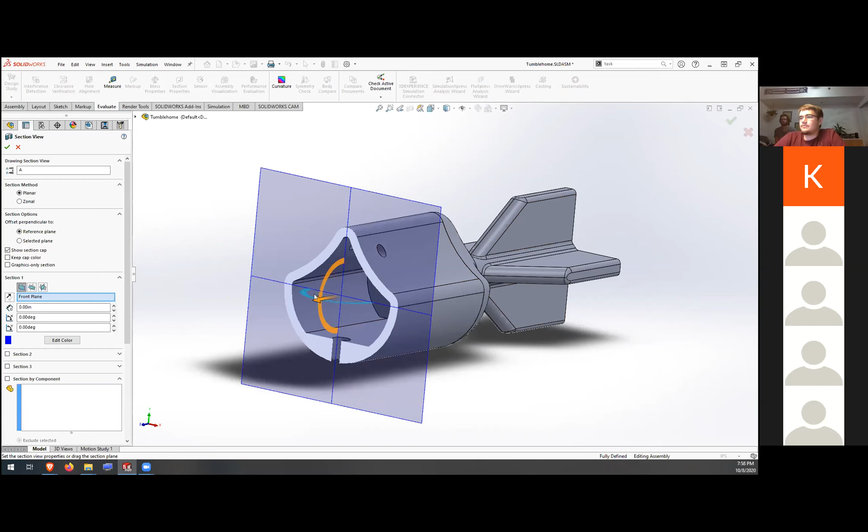So I think it looks pretty stable. There's nothing especially unstable about it. There might be some weird pitch stability, unsteady flow things going on, but that's beyond my purview. So I'll call it an 8. Integration, I'm going to put that as an 8 as well, because we haven't given anyone else an 8.

Looks - here's the most, I don't know how to put this, the most debated score of the night. A 3? You have a 3. Yeah, I'm gonna put it at 2, as you can see in the comments - aesthetics. Even the person who made it put it a 2? Yeah, it's pretty ugly. Just look at the front. I couldn't even properly loft it.

So we have a 20, we have a 3, we have a 2. Anyone else have any strong opinions on this score? Anyone in the chat? I'll put it as a 5 for effort.

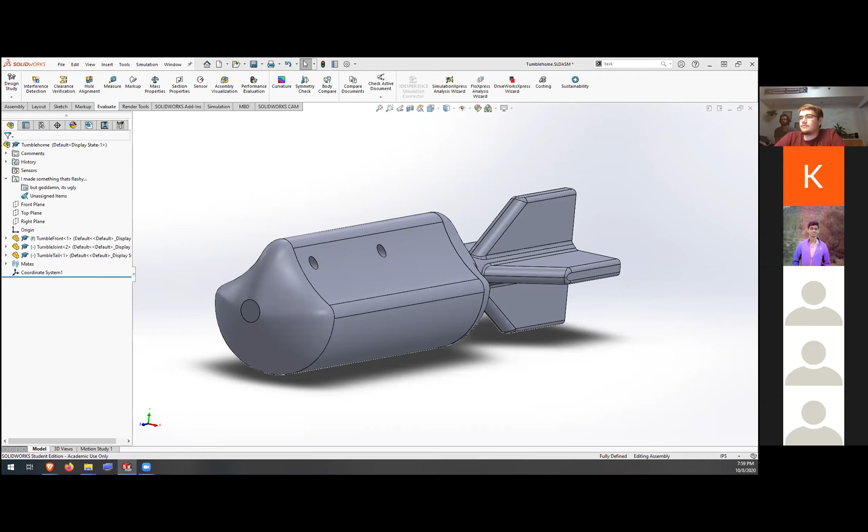All right, we can have the 20 in here, so we'll add a 2 and a 0 separately. All right, I'm giving the screen share back to you. Okay, what is the sum of 3, 2, 2, and 5? And 0. Yes, make sure to remember the 0. Don't forget your screen share. Yeah, I remember - I remember the 5th of November. So that's 7, 12 plus 0, so 12 out of 5.

2.4 is your aesthetic score. Not bad. I'm almost number 1, if you're counting the other way. No, this is actually winning because it's - wow, that's insightful. By the way, share your screen. Yeah, you guys haven't seen the final score yet, so.

All right, so you got 32.7666667. That's pretty good.

Ivan, you're here, right? Yeah. I'm working on the second prototype, but I haven't had a lot of time to do it. That's fine. I don't actually have yours up on this computer, or do I? Do I have it? Do I have your assembly on here? That is, Daniel, what happened to your computer? What happened to my computer? Yeah, I don't want to talk about that.

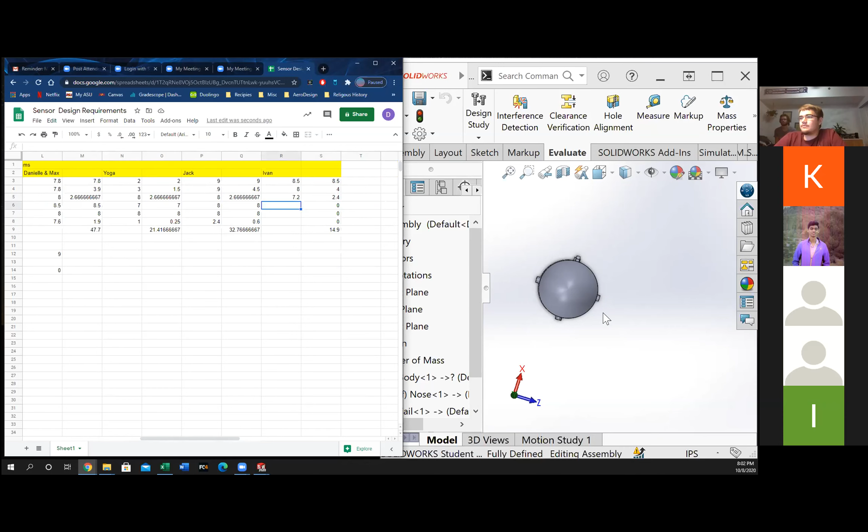And there's stability. It's got the flange bit - frustum, it's got the frustum. There's not that much compared to stability that you did differently than the other teams. It's just basically Danielle and Max's. So they got a 7.5, I think, 8.5 for stability. So you're gonna get an 8.5.

Integration, I'm just gonna put that as an 8 for everyone. And aesthetics - does everyone remember what this looks like? I can probably share my screen on my phone and take a picture, but it's like an 8. Okay, if you want to share your screen real quick. I wonder if that works on your phone. Sure, you can try. I will get the last thing set up first for Nitish's sensor design.

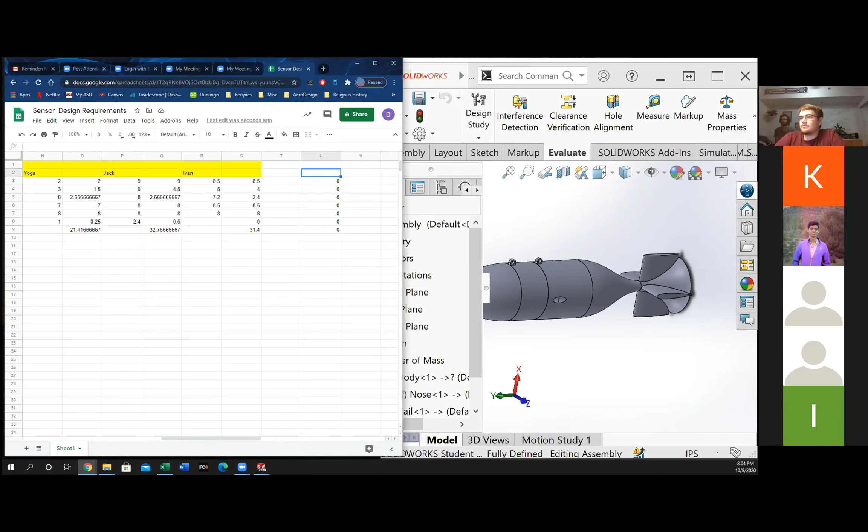You said sharing? Let me stop my sharing and see. It doesn't look like it. Try again. Should be - just put a picture in the comments. Yeah, I should put a picture, or put it in the Slack. People should be able to see it in Slack. Oh, that's true.

All right, I can't actually see the Slack, so go ahead and let me know what you guys think once you see it in the Slack. It's assembled in the picture I have on my phone, but you can kind of see how it's gonna be. Yeah, I would say an 8. The bottom is supposed to be heavy for the stability.

What's the difference between the two? Oh, one's an STL. Got it.

All right, so let me know what you guys think about the aesthetics. What would you score that out of 10? 8, I like it. Okay. Anyone else? I'm at 8 as well. All right, yeah, I'm willing to give it an 8.

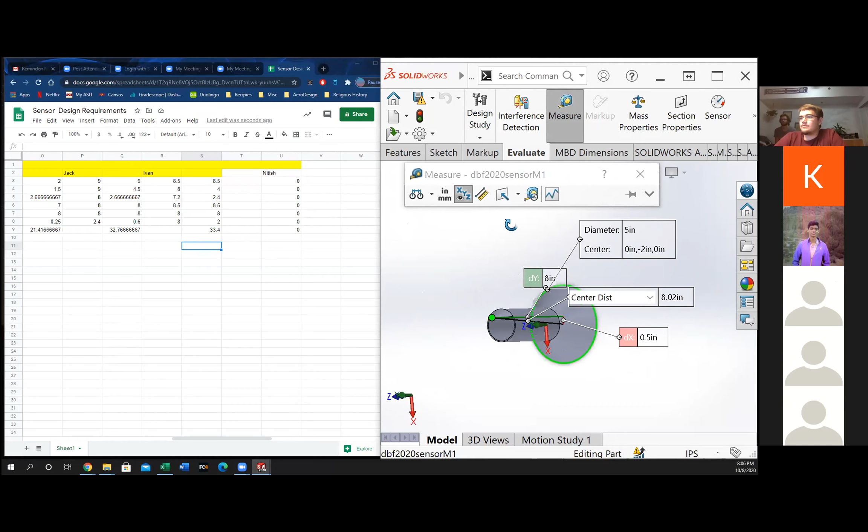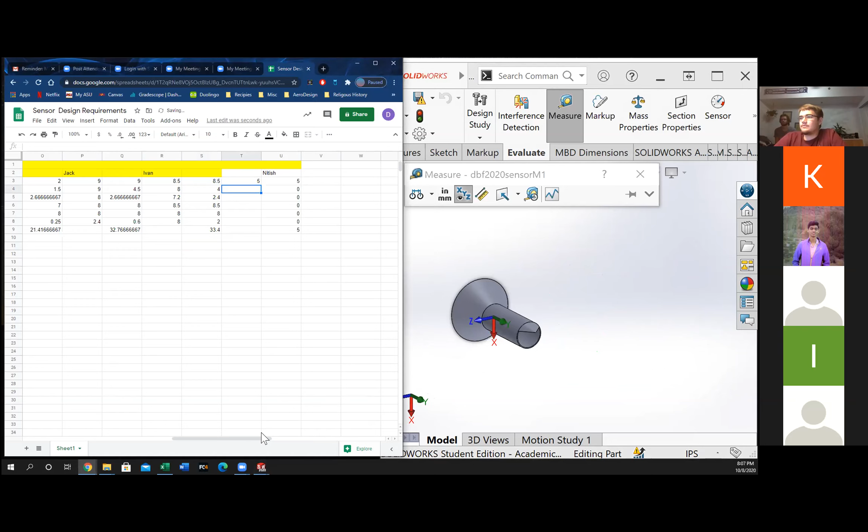Yeah, yeah. Okay, none of the proportions are correct per se. This looks like a fairly easy shape to make longer, though, but because the current iteration doesn't have the right dimensions, we're going to put that as like a 5. And because technically this wouldn't make a very good use of the volume in terms of creating extra weight, that's what I'm also going to do. And the other thing that was brought up is that it has a lot of surface area for what it is, because it has this internal channel, which increases our drag. So yeah, a 5 is a good place to put it.

So integratability, this looks like it'd be fairly easy to drag back into the plane. I'm going to give that an 8.

Manufacturability, I could probably just print this straight up. It wouldn't be too bad. We'll give that as an...

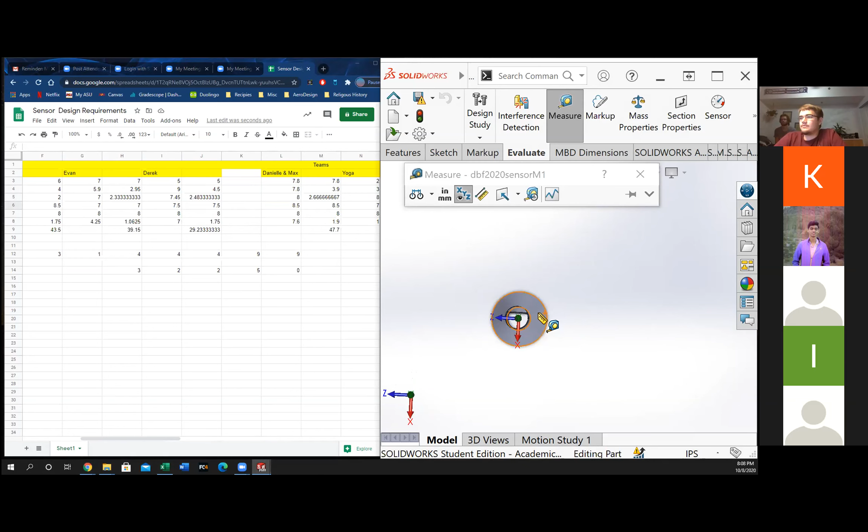8. Stability, I don't know exactly how you can get roll stability out of this. I should have added that, but it's on the assumption that the tow rope is on the top section, so the top is defined by the pointy edge, where all the mass is. So putting all the mass in closest to the center of rotation.

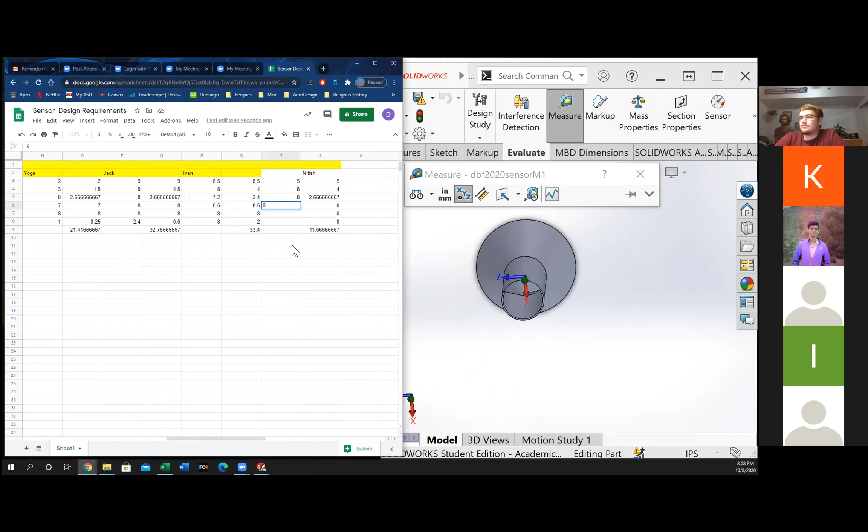Visibility, it would be kind of hard to integrate lights. You could probably put it on the ring, but fitting a battery and then the sensor or the electronics in here to have them stick out, you could gain more by having an enclosed volume in the middle to put stuff in. So I'm gonna put like a 4 on that, probably. Yeah, I'll put 5. All right.

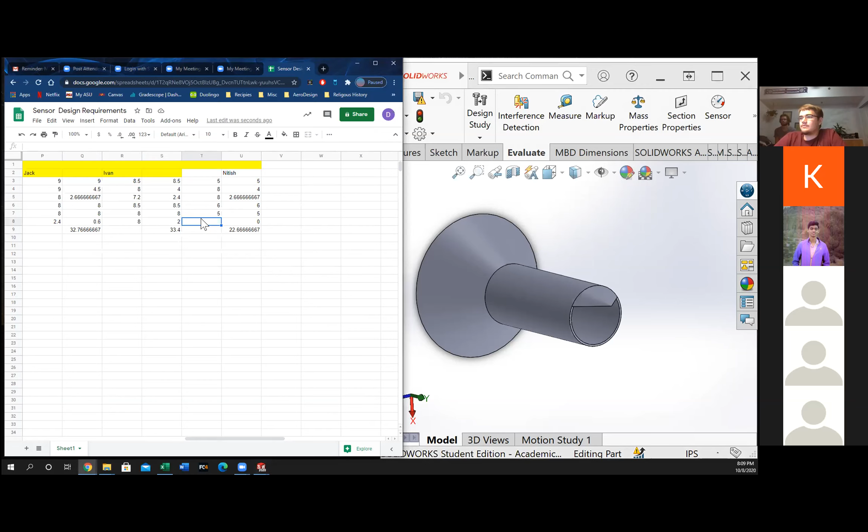Does the battery go in the top part? Yeah, yeah, section. Okay, all right.

So what matters now is this. So we have Kevin at 43.5. We have Evan at 39.15. Derek at 29.233. Danielle and Max is 47.7. Yoga is 21.41666667. Jack as 32.77. Ivan as 33.4 and Nitish as 23.58.

We'll probably print off like, I don't know, top 3, top 4. Check them off the building sometime. That's a lot of things to print. That's my time, well, the most valuable time of all.

However you were willing to print, Daniel? Yeah, as El Presidente, I have a printer too. Okay, yeah, I can send you a couple of these to print. I'll probably print, how many do we have? 1, 2, 3, 4, 5, 6, 7, 8.

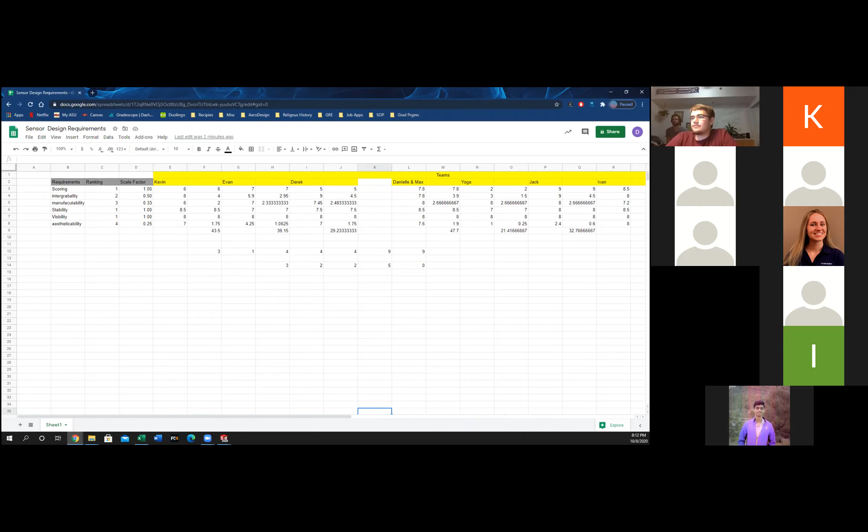Unrelated, I got the closet stuff. At 2, I'm going on campus at 2 to pick it up. Okay, all right, Max, you're fairly close to campus, right? Yes. You want to go with him so you can check to see if the motor boxes are in there? Yes, I would love to. Okay, I will send, yeah, I'll send you an email with their stuff. Okay, cool, thank you.

And then for the rest of you guys, we are hard at work trying to figure out what kind of shape this airplane is going to take. We're doing the hard math, the hard science, the hard number crunching, lots of numbers, lots of crunching, very crunchy numbers, to try and figure out what size plane will get us the best score. For the leaders, I will talk more about that at the meeting tomorrow. But other than that, that's about all I have to talk for.

What are you doing? Sizing the aircraft. All right. Thank you all for coming, and I will see you next time.